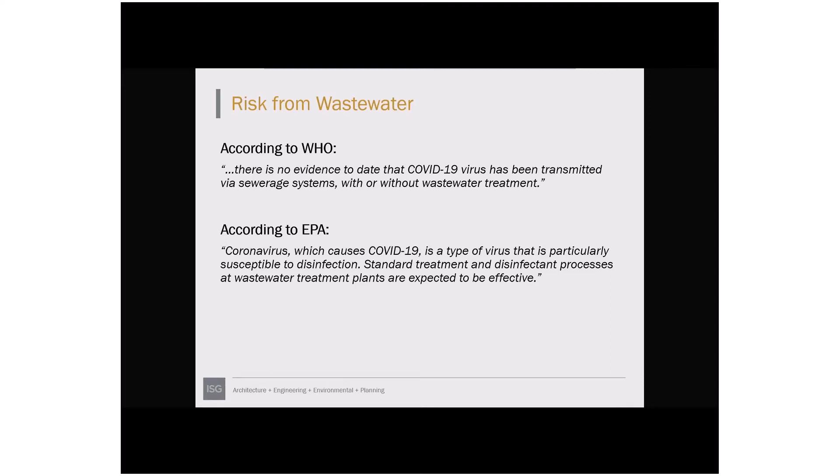According to CDC, the virus has been found in untreated wastewater, and if you're following the current news, there are some studies underway to determine the extent of a community's infection based on the amount of virus or antibodies they're finding in the wastewater system. So some really interesting research being done on that, so stay tuned for more. But there is no information to date that anyone has become sick with the virus because of exposure to wastewater.

What that does mean, though, is you need to follow your standard practices for protection. You need to follow your PPE requirements, practice good hygiene, good safe work practices, and as always, make sure that you're washing your hands well.

So there are several resources available out there, and EPA has a good resource for drinking water and wastewater. It covers system operations, laboratory capacity, funding and financing options. It includes a pandemic incident action checklist that I'll talk a little bit more about, and other resources.

So if you're having trouble or challenges with system operations, I would encourage you first to reach out to the state DNR staff. Reach out to your field office for operator assistance and to the operator certification staff.

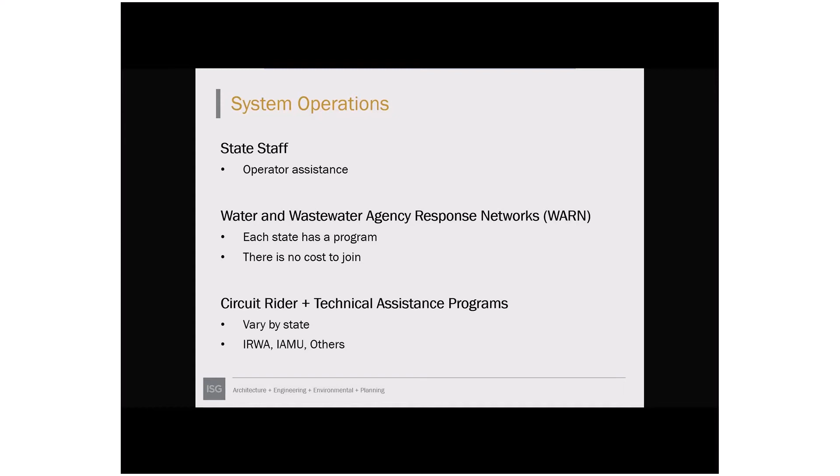So sampling. These are Iowa-specific guidelines. If you are listening in from another state, I would encourage you to check with your state regulatory staff. But in Iowa, you need to sample according to your NPDES permit, including at the frequencies and locations required.

If you're having problems doing that due to interruptions or problems for access, contact your DNR field office. There is some flexibility available in meeting your permit conditions, but you need to consult with your DNR field office staff in regards to those and in regards to other options that you have.

A little bit about the Pandemic Incident Action Checklist. This is a checklist resource from EPA, and it addresses impacts to both drinking and wastewater utilities. The following are included, but there are additionals: staff shortages due to absenteeism or illness, supply chain disruptions if you're having trouble getting chemicals, materials, or personal protection equipment, and interruptions in field operations, such as challenges making repairs due to lack of materials or staff, meter reading or sampling, and simply the inability to maintain all operations.

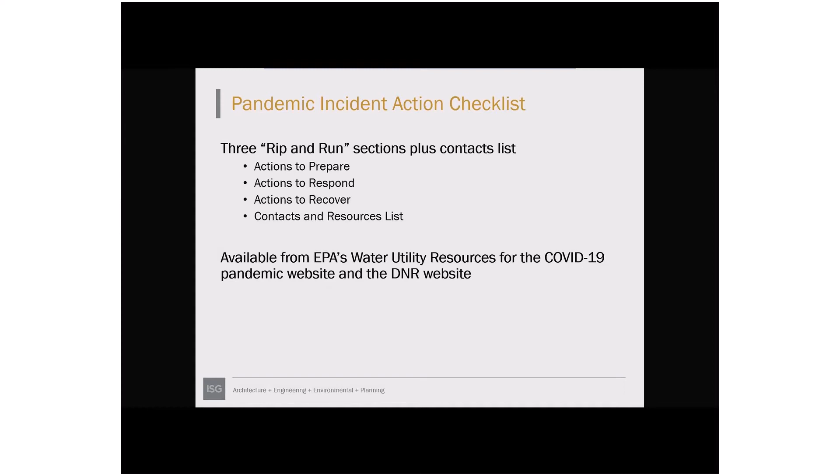Some additional resources: as I mentioned earlier, the EPA has a COVID-19 water website that includes both drinking water and wastewater. The Water Information Sharing and Analysis Center, Water ISAC, has good information. The Centers for Disease Control and Prevention, CDC, has a page specifically about water transmission and COVID-19. The Iowa Department of Public Health and the World Health Organization also both have very extensive COVID-19 websites.

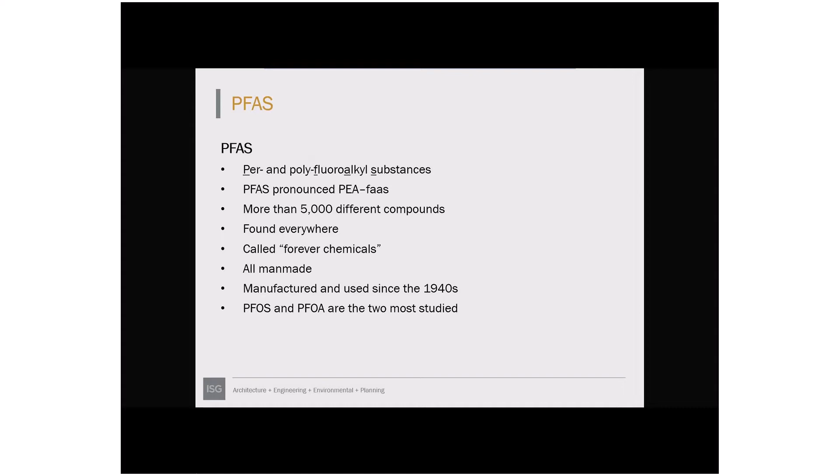Switching gears, a little bit about PFAS - per- and polyfluoroalkyl substances, generally pronounced PFAS. This is a big group of compounds, including more than 5,000 different compounds, and they're found everywhere. They're starting to be called forever chemicals. These are all man-made chemicals; none of them are natural or found normally in the environment. They have been manufactured and used since the 1940s, and PFOS and PFOA are the two that are most studied and the two you hear the most about.

So where were these used? They're used in a number of applications. One you hear a lot about is AFFF, firefighting foam, particularly used at air bases, airports, and air fire training centers. Also stain and water repellent coatings for textiles - think boots, raincoats, stain proofing on furniture and carpets, and similar uses. It's also in oil and moisture resistant food packaging - the coating on pizza boxes, microwave popcorn bags, and fast food wrappers.

It's found in a number of household products - it's the Teflon or nonstick coatings on pans. They're found in paints, waxes, and cleaning products. They're also found in personal care products - shampoos, dental floss, cosmetics, those types of things. They're used in metal plating and etching, wire coating and insulation, and a number of other products.

So why are these a problem and why do we talk about them? Well, they bioaccumulate, meaning they don't degrade and they persist in the environment. They don't degrade under natural conditions. They dissolve in water and move with groundwater precipitation. To degrade them thermally requires very high temperatures, greater than 900 degrees Celsius. There are numerous health issues at very low levels, parts per trillion, including low infant birth weights, effects on the immune system, some cancers, increased cholesterol levels, thyroid hormone disruption in humans, and a number of others under study.

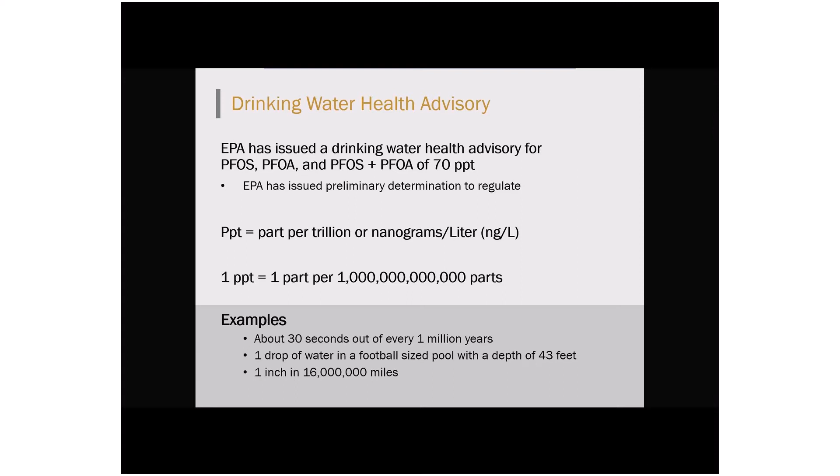EPA has issued a drinking water health advisory for two of them and the combination - PFOS and PFOA and the combination of the two at 70 parts per trillion. EPA has also issued a preliminary determination to regulate these in drinking water. PPT is parts per trillion, or nanograms per liter - that's 1 part in a trillion parts. Examples of how small these levels are: it's about 30 seconds out of a million years, or 1 drop of water in a football-sized pool with a depth of 43 feet, or 1 inch in 16 million miles. So these are very, very small levels we're talking about.

In wastewater, we see PFAS found in domestic wastewater coming into your influent, in industrial wastewater, in landfill leachate, and in water treatment plant waste if your water treatment plant is removing or treating to remove PFAS. We're also finding it in your effluent and in biosolids, present in both. This is a cycle I want to spend a little time talking about. Truly what we're doing is just moving them from one area to another. Remember, PFAS don't degrade, they don't disintegrate, they don't come apart - they persist in the environment.

So if you have PFAS in an industrial use, whether it's a production or a use, if you're getting wastewater from that industry, it can be in your influent and go to the wastewater treatment plant. If you're getting landfill leachate, it can come to you through that, or it can come to you through residential wastewater, domestic wastewater. It's found in products such as food waste, in packaging, and in materials that are treated, and we see that come to the wastewater plant that way.

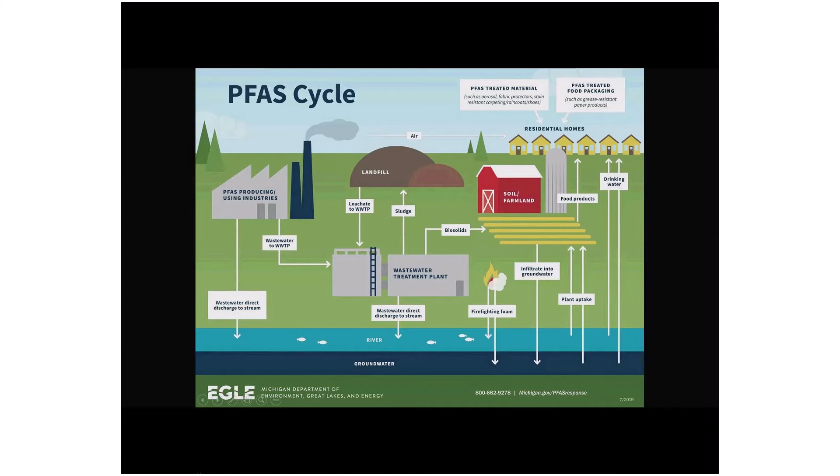So why are we talking about these? Well, media coverage and public awareness about PFAS has really increased. So you need to be aware of these compounds, so if you get questions or if the media asks you about them.

There have been several reports from environmental groups. One of the most recent ones is from the Environmental Working Group, and if you're not aware of that one, I'd encourage you to go look that one up. There have been a couple documentaries recently released. One is The Devil We Know, and the other is Dark Waters, and they've both gotten media coverage. And then there's been recent coverage of the Department of Defense sampling at Air Force and Army bases, where they have discovered some very high levels of PFAS.

So the regulatory actions that have been taken: in 2003 and 2015, companies voluntarily ceased production in the United States. Manufacturing has continued in other countries, and these products do come into the United States as raw materials that way and through various products.

In 2013 through 2015, the EPA included 6 of the PFAS compounds as part of the Drinking Water Unregulated Contaminant Monitoring Rule number 3, and that was to determine the extent and levels found in drinking water throughout the country. In May 2016, the EPA established a health advisory that we already talked about for drinking water. In February of 2019, the EPA issued their PFAS action plan, and we're going to talk a little bit more about that in a few slides. And then in February of 2020, EPA issued a preliminary determination to regulate both PFOS and PFOA in drinking water.

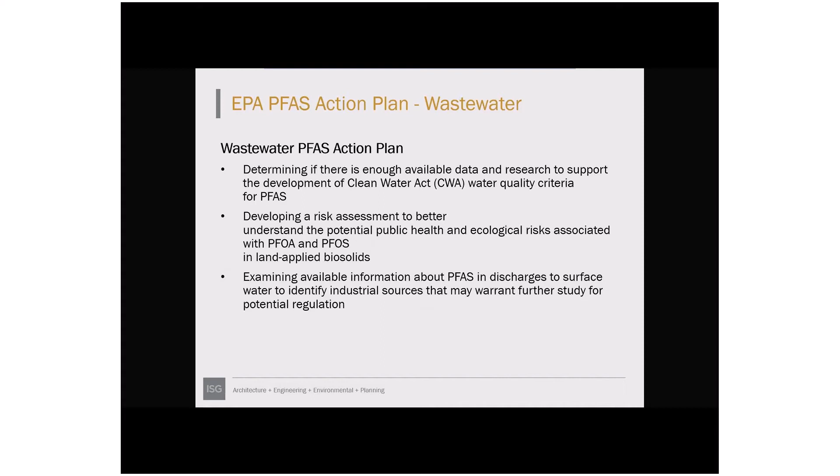And it also includes examining available information about PFAS discharges to surface water to identify industrial sources that may warrant further study for potential regulation. So as a wastewater operator, you need to know that there's a lot of research being done, there's a lot of data being collected, and there's a lot of conversation about whether or not these should be regulated as part of your wastewater permit.

So state actions - what I've just talked about was at the federal level. At the state level, several states have established statewide drinking water MCLs or enforcement limits. Some states are starting to have wastewater effluent limits or guidelines. The state of Michigan has gone so far as to have a discharge limit, an actual enforceable limit. Minnesota has been working on this since 2002. They have an area of contamination in the Twin Cities due to the manufacture of these compounds.

And in February of 2020, Iowa DNR issued their PFAS action plan, and it's available on the DNR website. The Iowa DNR is using the EPA health advisory levels for drinking water limits, and they do not have any limits for wastewater at this time.

So if you're thinking about sampling and analysis, I want you to remember that these compounds are all around, so sampling and analysis are very challenging. You need to consider: why are you sampling, if you're thinking about it? What are your objectives if you're going to sample? Why are you sampling? What do you want to learn? What compounds are you going to include in the testing? Remember, this is a group of more than 5,000 compounds. Which method are you going to use? And what are you going to do?

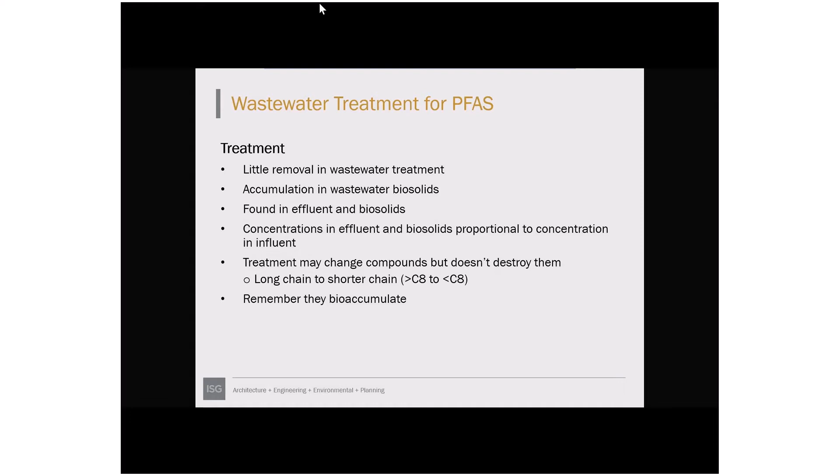So there's a lot of concern about biosolids. PFAS compounds have been detected in groundwater and surface water following biosolids application. And the main concern there is for drinking water sources and for surface water.

We are seeing uptake in plants, and then as those plants are fed to animals, we see accumulation in the animals. We see it in fish, in meat, and in milk. There are a number of stories out there about milk needing to be dumped because of the PFAS levels in the milk. It also accumulates in grains, fruits, and vegetables. There's a tremendous amount of research being done, and you're going to hear a lot more about this to come.

So there are a number of good resources out there for you. Those include the EPA PFAS website, the Interstate Technology and Regulatory Council, ITRC, has some very good fact sheets and videos. They also have a very good table of state regulations.

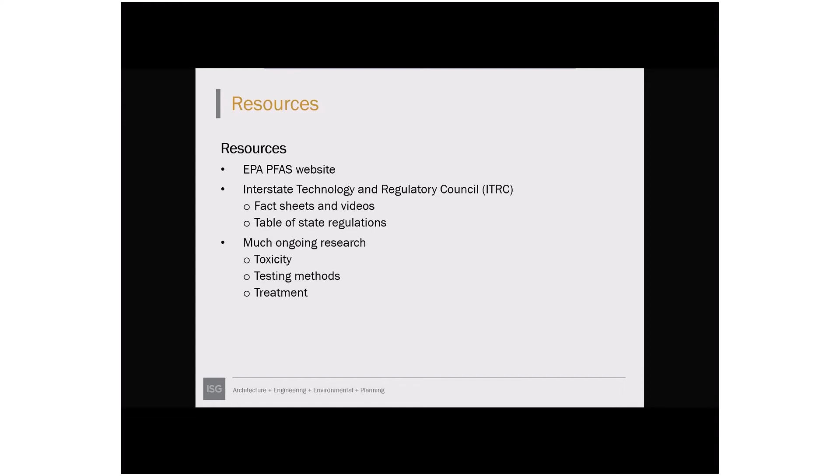Okay, switching gears a little bit about chloride compliance. So chloride, we talk about it because it's toxic to aquatic life, both aquatic plants, invertebrates, including fish. It's a base compound, it's an ion, there's nothing for it to break into, and it's not removed from the environment. It's very mobile and it moves with water easily, and it's not removed in the wastewater treatment process.

And as I said, it's toxic to both aquatic plants, fish, and other aquatic life, and then we are seeing increases in drinking water because of the discharge to surface water and groundwater.

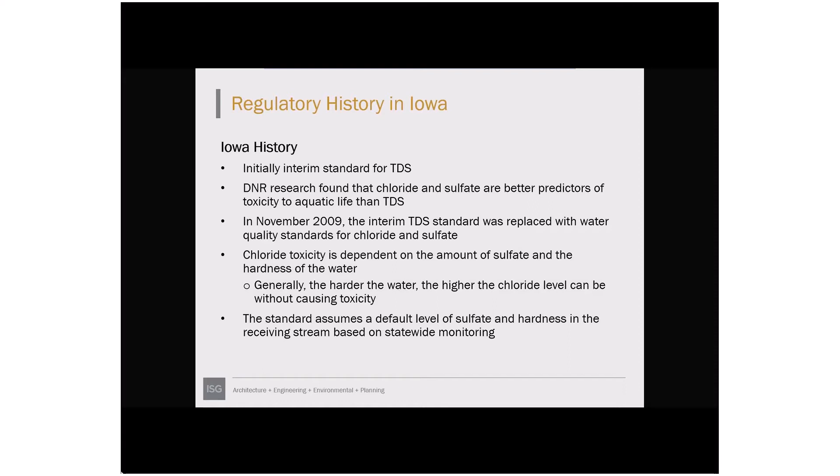If you have an NPDES renewal application, part of that process is doing sampling for chloride levels. Chloride limits are included in your NPDES permit when your sampling data indicates a reasonable potential to exceed the standard. And compliance schedules are included if immediate compliance is not likely.

There are 3 primary sources of chloride in your wastewater: home water softener discharges from the regeneration brine; municipal centralized drinking water treatment residuals that are a brine or salty discharge, such as from ion exchange regeneration and some coagulants that are high in chloride; and the third is industries that use salt in their processes.

Secondary sources, which are much smaller contributions, are personal care and household products from domestic wastewater and food waste.

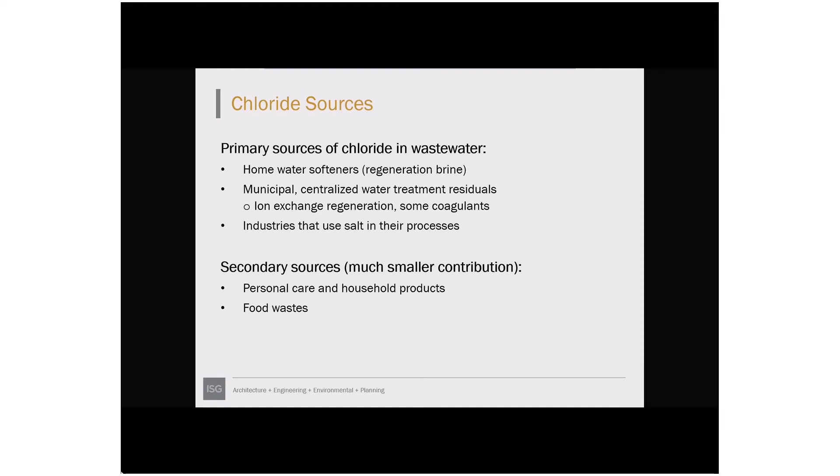So if you have a chloride compliance schedule or are struggling with your chloride compliance, there are 11 options, and we're going to go through these options to achieve or maintain compliance.

The first one is to reduce your chloride in your influent. You want to look at and reduce contributions from home water softeners, from municipal ion exchange treatment if your drinking water uses that type of treatment, and from industrial users.

From your industrial users, the best way to identify their contribution is to sample their discharges. If there's a significant level of chloride in their discharge, you need to work with that industry on chloride reduction options, which can include use of alternative chemicals or different water treatment within their compound or facility.

Ion exchange and water softeners use an ion exchange process to remove contaminants. Softeners remove hardness, calcium and magnesium, and/or radium. If you're doing anion exchange, that removes nitrates. All of these methods use a brine solution from either sodium chloride or potassium chloride to regenerate the resin. These are all resin-based treatments.

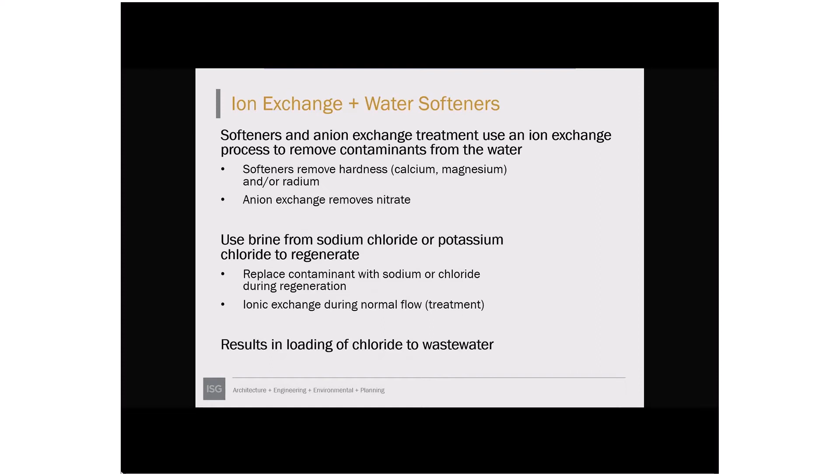Home water softeners have been found to be the biggest source of this. So utilities really need to consider some options, including encouraging your homeowners to maintain their softeners. We're finding that poor maintenance, iron fouling, and resin deterioration causes more frequent regeneration, and the more often they need to be regenerated, the higher that chloride load.

You should consider encouraging your users to change to demand softeners. There are two types of softeners: time softeners and demand softeners. Time-based softeners regenerate based on time, every Tuesday and Thursday, or at whatever period is set; some regenerate every day. Whereas demand softeners regenerate based on the level of hardness rather than time. So you need to encourage the use of those demand-type softeners.

Encourage your customers to soften only hot water taps, not cold water outside taps. Don't have them soften their entire home and their outside taps. You should consider educating your customers on the benefits of not softening to 0 grains, not softening completely, which will cause less corrosion to their internal plumbing and save them considerable amounts in salt for regeneration. I'd also encourage you to consider incentives for your customers to upgrade their softeners to demand-type softeners. We've seen that work well in some communities.

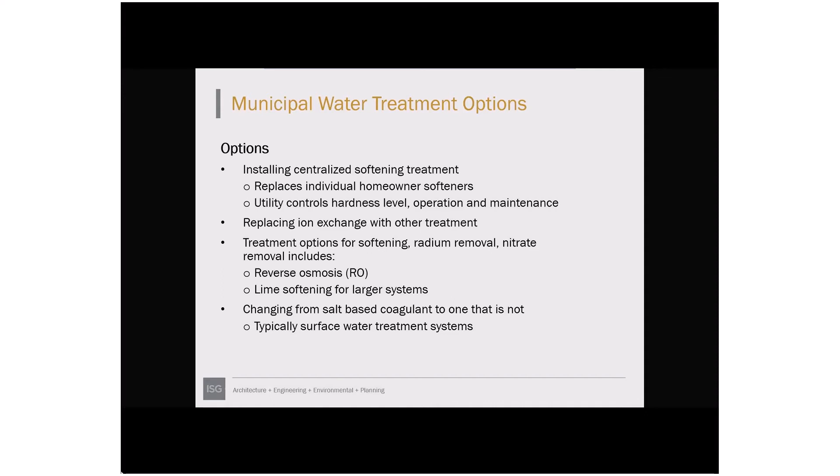A second option is to reuse or recycle the water. Investigate if the effluent or the high chloride portion of the influent could be used for other purposes. This can both reduce the amount of your effluent, leading to greater dilution in your receiving stream, or eliminate it completely. Options for that reuse or recycle could be for cooling water purposes, livestock watering, and other uses.

The third option is site-specific limits. Remember that the chloride limit is based on the hardness and the sulfate level in the receiving stream. If you sample for those parameters, you can provide data for your specific discharge site and not use the state default settings. This would require you to sample upstream, in the receiving stream, and at your discharge for 1 to 2 years — monthly sampling for 2 years, or twice per month sampling for 1 year.

For controlled discharge lagoons, you sample during the 3-month discharge period. You would need to sample the upstream site during all 3 months of the discharge period, and then sample when you're discharging — those are paired samples. That data is submitted to DNR for review and calculation to determine if they can revise your chloride limit.

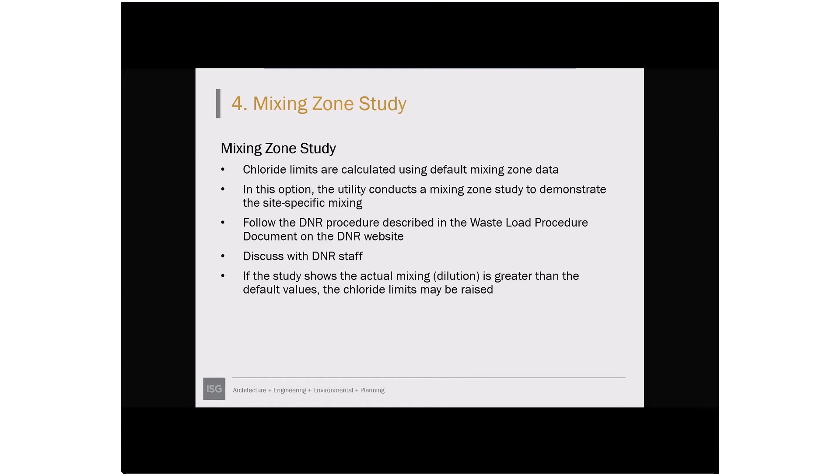The fifth option is to pipe to a larger stream. If you discharge to a small stream, consider constructing a pipe and discharging to a larger stream, as this may increase your chloride limit. You need a stream with higher critical low flows. Remember, you don't remove or eliminate your chloride, but dilution lessens the toxicity — the greater the dilution, the lower the chloride level in your receiving stream, and the less the toxicity.

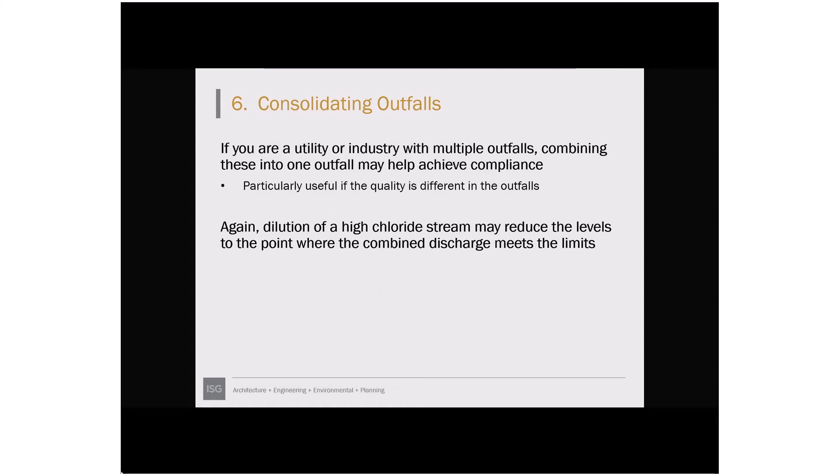The next option is consolidating outfalls. If you're a utility or industry with multiple outfalls, combining these into one outfall may help you achieve compliance. This is particularly useful if your quality is different across outfalls — if one outfall has a high chloride level and your other outfall has very low chloride levels, combining them again achieves dilution. If you dilute that high chloride stream, you may reduce the levels to the point where your combined discharge meets the limits. That's another option to consider.

The seventh option is stepwise limits. In this option, you would only discharge when the receiving stream flow is above a specific level. At this higher flow level, your chloride would be diluted to a point where it's not toxic after mixing in the receiving stream. Factors to consider: do you have enough storage for low flow conditions? During low stream flow, you would have to store what you'd normally be discharging, and then discharge it when you've got higher flows. You also have to accurately measure your stream flow so you know when you're at the level you're allowed to discharge. I'd encourage you, if considering this option, to consult with DNR.

The eighth option is to install a diffuser. This includes installation of an in-stream diffuser to allow rapid mixing and greater dilution. This diffuser has to be properly designed because what you're trying to achieve is rapid mixing to minimize toxic effects, while also allowing for safe fish passage. This option requires that you do a dye test, modeling, or other means to demonstrate that the mixing is complete within 100 feet downstream of your discharge location. There are several permits required for this in addition to your wastewater permits, and you need to contact DNR staff if you're considering this option.

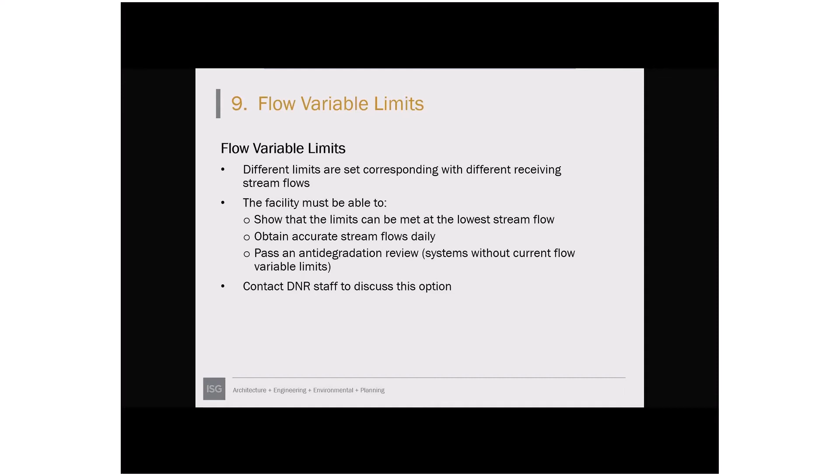The tenth option is disadvantaged status. In this option, you would have your compliance schedule extended based on qualification as a disadvantaged community. There is a very detailed flow chart that would walk you through what's required to determine if you meet those disadvantaged community requirements, and they're very specific. I would encourage you to contact DNR staff to work through that process and determine if you qualify as a disadvantaged community.

The last one is a variance request. If you have no other options, you can apply for a temporary variance from the chloride standard. This is a very detailed process requiring approval from the EPA and DNR rulemaking, used as a last resort after you have exhausted all other options. Again, I would encourage you to contact your DNR staff to discuss these requirements.

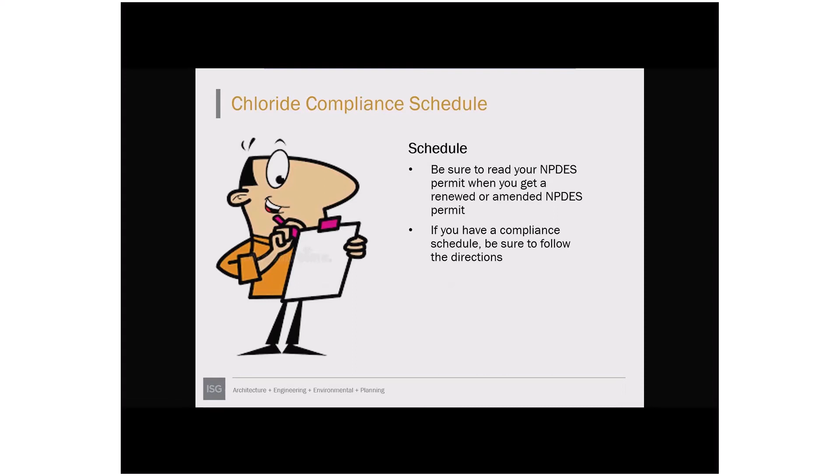I would encourage you always, when you get a new or amended NPDES permit, to read it when you get it. Make sure you go over it and understand what it includes. If you've got a compliance schedule, be sure to follow the directions and the requirements.

So you need to be on top of this. When you get a revised or new renewed NPDES permit, it looks like that achieved compliance date is a long time, five years out. But understand that this facility had actions they needed to take within 3 months and within 6 months, and then annually submit reports after that. So it's very important that you read your permit and understand what that compliance schedule requires.

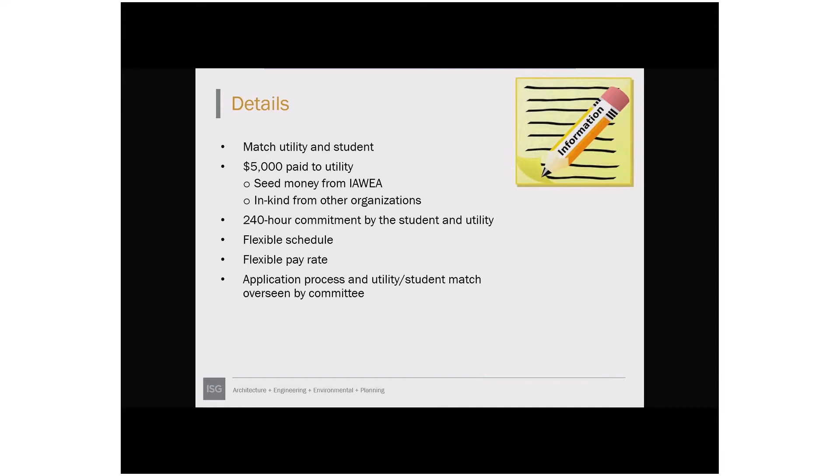It includes flexible schedule and flexible pay rates. Both the schedule and the pay rate are negotiated between the utility and the student. It also includes an application process both for the utility and the student, and for the utility and student match, which is overseen by the committee.

The COVID-19 situation and schools being out of session for the remainder of the school year has created some challenges for us, but we're in the process of matching the first utilities and students. So if you have interest in being a sponsoring utility, please contact any of us, and we will talk to you about the details, provide you with additional information, and be happy to explain further.

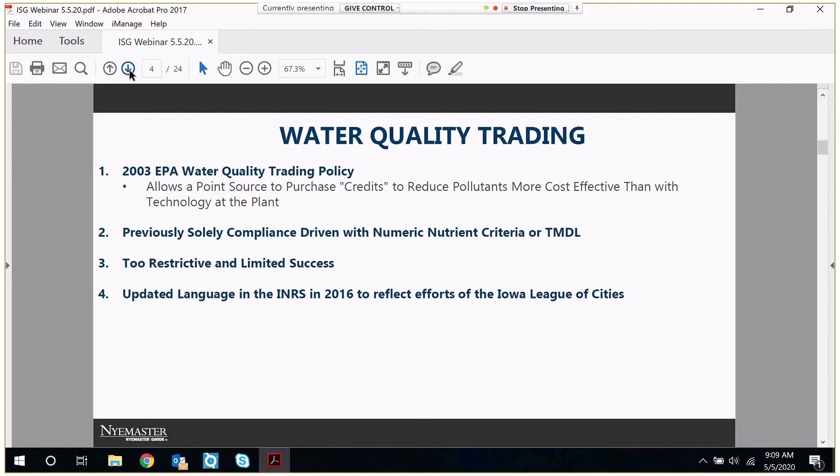So that's where the development of the Nutrient Reduction Exchange began. As I mentioned, it really was a process driven by the league from 2013 to 2018, and that is important. And what you would hear from DNR is one of the things we identified, is that in other states it had been a regulatory agency driven process and not really thinking about how communities would actually utilize them.

For us, we tried to work directly with the wastewater operators in the cities to actually understand what would be useful to their communities. And in the same boat, we also included agricultural commodity groups and advocacy groups to understand what would producers see as an advantage.

That was extremely important as we looked at that, because as I went to national conferences to get an understanding of water quality trading, the key here is it's important to understand that while an edge of field infrastructure project looks very good to a wastewater operator because it looks like a stormwater practice, that actually has no economic benefit to a producer.

So for them to spend money at the edge of field on something that they don't actually get to achieve can be a challenge. So how do you get that person to think differently is important. And having those two groups there, understanding the motivations and understanding a difference in thought process and worldview, helped develop a process that actually works.

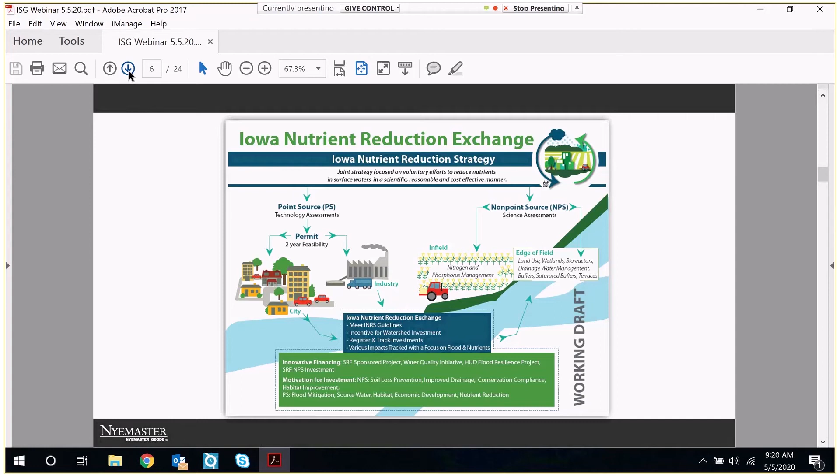Here are the regulatory incentives that we discussed with DNR through this process. And let me just say, the Nutrient Reduction Exchange is available. You can use it today. While the project ended in 2018, 2019 in setting this in place, the whole goal was not only developing it so that the state could identify those things that were most important for the state in developing this connection between a non-point source and point source, but also individually tailored to the wastewater treatment plants.

So we put our thinking caps on and said, okay, if I were to make a buffer strip project a county away, and I'm looking at this from a flood reduction standpoint or source water, here's the environmental benefits, the regulatory incentives that I want to achieve from the department. What are those regulatory incentives? I'll go through these in more detail, but it's important to understand that you can go in and ask for any of these things, and we've gotten the DNR to say yes. However, if no one wants to use them, there's no reason from a policy standpoint for the DNR to develop those policy tools to actually make them usable.

So the first one being utilized in the current community that I'll cover towards the end: you'll see these trade ratios at a 2-to-1 or 3-to-1 to essentially offset performance, since your buffer strip doesn't perform the same year after year, which is why you model and determine this error aspect. But what people wanted was to provide an incentive before this becomes a permit requirement. They wanted a 1-to-1 ratio for their projects if they build before it became a permit requirement.

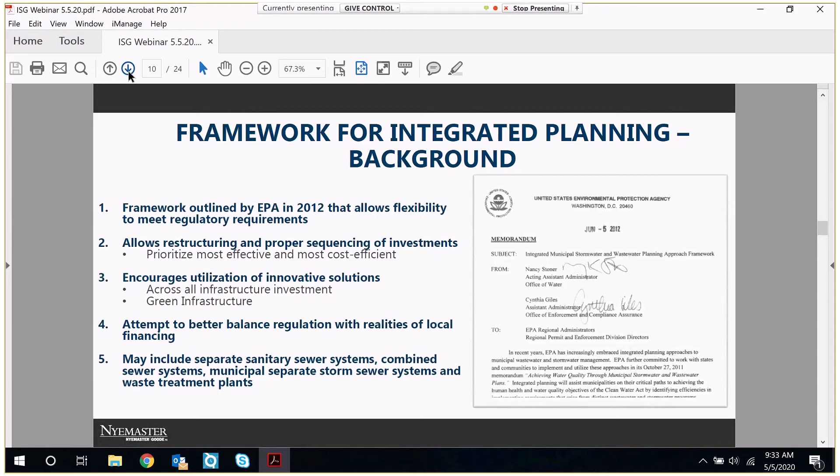As we develop an integrated plan with multiple other cities, if somebody has a compliance schedule, if somebody has an admin order, we develop the plan and then work on those additional tools to include those.

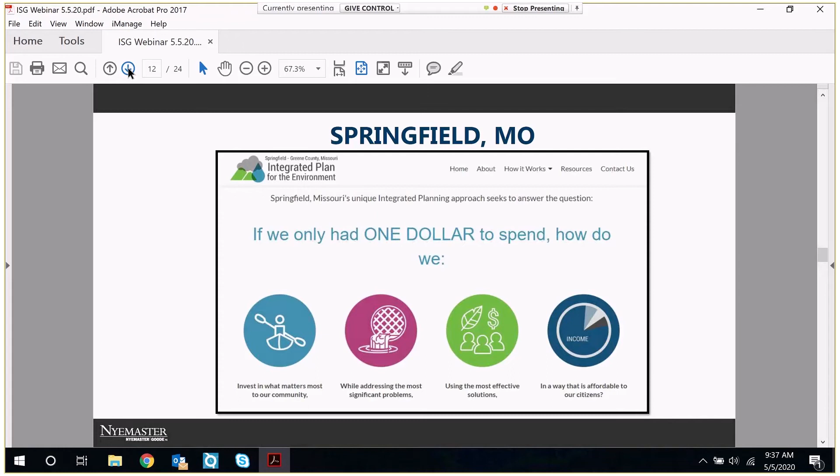The easier example, and if anybody's interested in this, my email's at the end and you can email me and I can send it to you: the city of Boone put one in place around the 2015 timeframe.

What it essentially looked like was probably what you guys are doing in a lot of your permits anyway, kind of a CIP schedule or their infrastructure schedule, being thoughtful about where the investments will occur, and then writing a narrative around it as to why they think they should be able to extend it.

You could see their big key here was on UV disinfection, and really their whole goal was to try and kick that out in a way that fit within their larger city budget for their citizens from a rate increase standpoint. They also had significant I&I issues, and their justification was to try and knock down a lot of the I&I because their storm surges were so huge that if they could knock down the I&I, by the time they were to size their UV technology, it would be in a much better place.

Now, that was their ultimate motivation, but the narrative, from FY17 there, to the UV disinfection, was all about achieving a better benefit of knocking down I&I and other environmental benefits.

This is probably a 7 to 10 page document in comparison to the Springfield one, which would be multiple hundred pages of documents over multiple years. This is essentially a compliance schedule that many of you worked on across your communities, just done in a fashion that puts more narrative behind it.

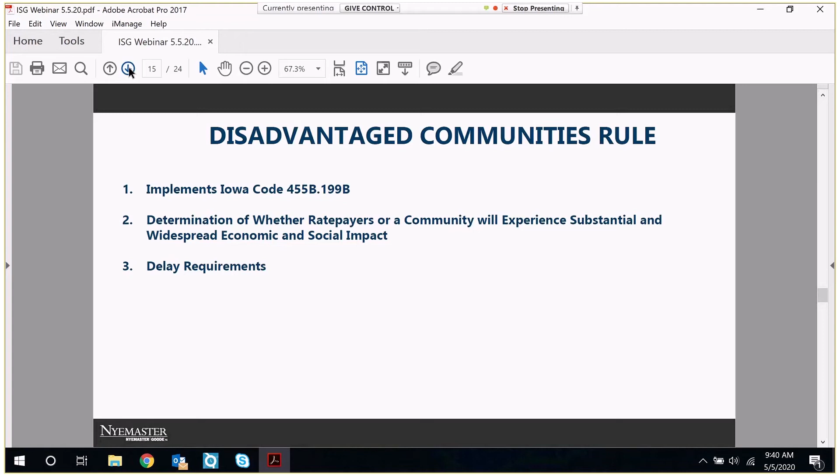I wanted to cover some resources, because it's not enough to just tell you here are some policy solutions—at some point, whatever you commit to with DNR and the EPA, it would be nice to have somebody pay for some of that. As I mentioned, the water and environmental programs at USDA Rural Utilities Service have population threshold restrictions. For the grant portion it's fairly low, but I'm sure many of you have utilized USDA Rural Utilities Service funding, which is loan and grant based. The grant is restricted based upon size.

WIFIA is available. What I'd say with WIFIA is this is generally above $50 million for a project—another fund available. Honestly, unless you're trying to do something extremely innovative under WIFIA, our state revolving fund is operated so well, and the interest rates are so low, I would probably direct people to our SRF, just because of the thoughtfulness as to how it's been operated and developed in the state of Iowa.

Our sponsored project program—we were only the third in the country to do this. And what's interesting is we were the first to allow sponsored projects to be outside of city limits, which is a real innovation around the country. That kind of happened accidentally, where the Rathbun Rural Water Association wanted to address source water issues because of a massive phosphorus problem they had, but it's certainly allowed all of us to innovate, especially on this concept of nutrient reduction exchange or water quality trading.

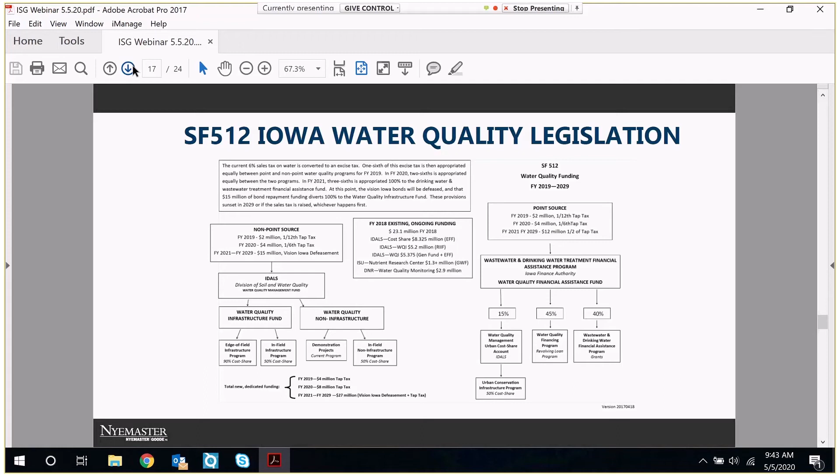The legislation that came out in 2018—I'm sure ISG will make these slides available to you, you're welcome to have them. This just gives you a broad overview of how the money will flow to you and to the projects, but specifically how the projects were identified through existing programs: a cost share, which would not necessarily impact urban communities; the Water Quality Initiative, an annual appropriation at the state level of roughly a little over $10 million, which has an urban infrastructure component that's been paid for since then; and other aspects that have been paid into since 2013.

Those were things that were already existing. What was created in the law were some edge-of-field programs. This is all non-point source, so I won't go through it in detail, but this is where your opportunity lies, in a project thinking about edge-of-field infrastructure. This is up to an 80% cost share, so you could actually achieve a project upstream or in your watershed and pay very little to achieve the benefit back from the Department of Ag and Land Stewardship.

This can also be utilized in a demonstration project. These are HUC 12 related on the demonstration project side, and HUC 8 related. You can see there may be an opportunity if you continue to look at updates on IDALS' site, to find existing projects that you could partner with in your community.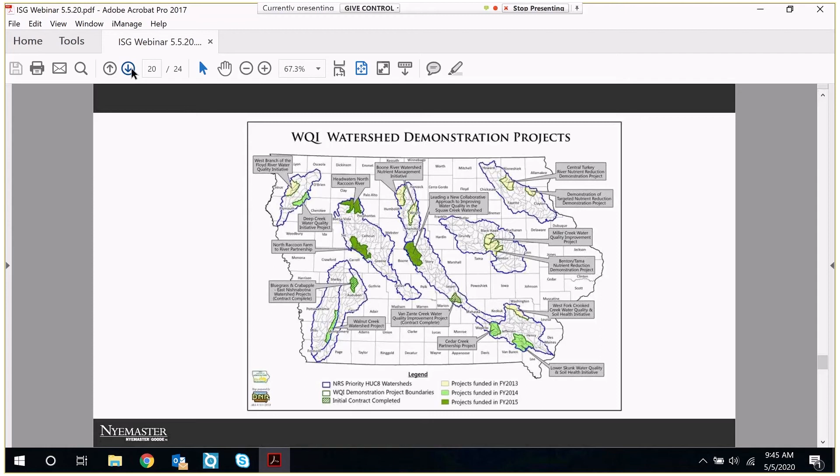But here are the major things that are now available to you that weren't before. First and foremost, there is a new state-money-only revolving loan fund. It's important that it's state money only because it has the ability to avoid Davis-Bacon and American Iron and Steel requirements, so some of the benefits you're trying to achieve, even just from a regulatory standpoint, might save you a little money.

What I will say is there's a little frustration in the law because it has a trigger for this three-eighths of a cent funding, so the ability to leverage has been limited, and they've been having to wait for the appropriation. With a slight law change, that $51 million could be leveraged and bonded against immediately, and look more like $151 million. Eventually, this will mean lower interest rates to incentivize people for certain types of behavior.

But until it is mature, it will have some limitations. The one thing I really wanted you to be aware of is that as funding slowly comes into IFA, there's a grant program capped at up to $500,000 that will be coming out through IFA. The money is slow, but as I mentioned, full ramp-up is this year for the program, and it runs through 2029. For more information, feel free to reach out.

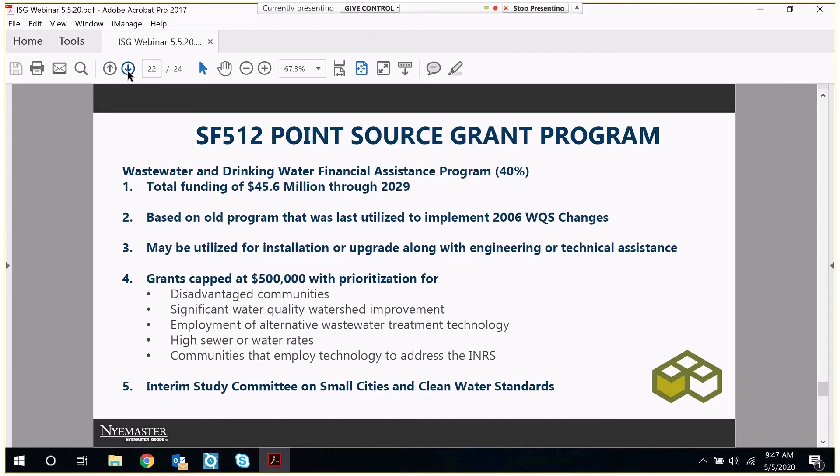And finally, there is the Urban Conservation Infrastructure Program that IDOA has had under the Water Quality Initiative. Now through 2029, the Department of Ag will have an additional $17 million to put towards urban infrastructure. These have been used for permeable pavers, for buffer projects in parks, but there's a whole lot of flexibility available to decrease erosion, with the whole focus being on water quality.

So I wanted to leave those resources with you. My contact information is here. If anyone would like to reach out on any of these subjects, I'm happy to take it. I don't know if we have any questions, but I'm happy to take them.

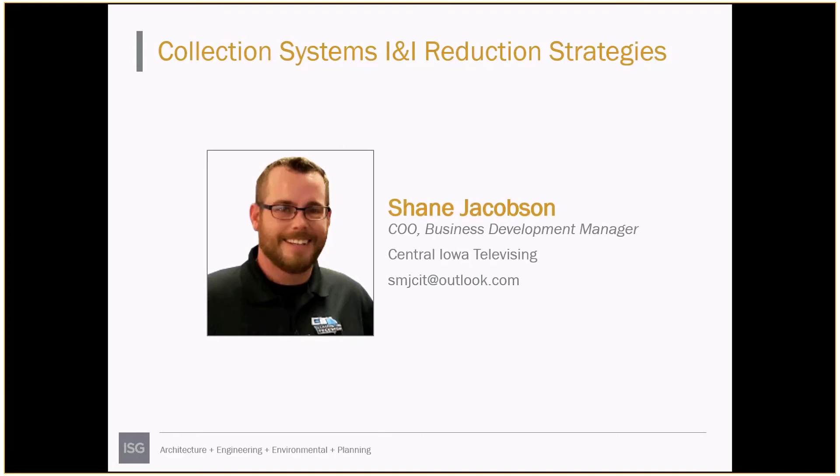Jumping into my piece here, some objectives to define up front that we're going to go through. Lots to run through in the time slot that we have, so I'll try not to be too quick, making sure we cover everything. Components of flow in a collection system - a basic introduction to the water being conveyed to the treatment plant. The evaluation process we typically follow to evaluate a system and prioritize recommendations, collection system flow analysis methods, and then how we use modeling to evaluate capacity in a sewer system.

Sewer collection systems are a conveyance network designed to collect and move flows to a downstream treatment facility - anything that gets moved from point A to point B throughout the city down to the treatment plant. It's a network of pressure and gravity pipes to convey the wastewater. There are really three types of systems we look at. There's a separate system where you have an isolated sanitary network and storm sewer network. They flow just in their isolated pipe networks throughout the system.

A combined system is where we have clear water entry getting into the sanitary. Systems are typically sized to be larger to handle that peak flow. And then a partially separate system, or maybe some areas of town where we can't get those combined connections off, and we just leave them connected to the sanitary.

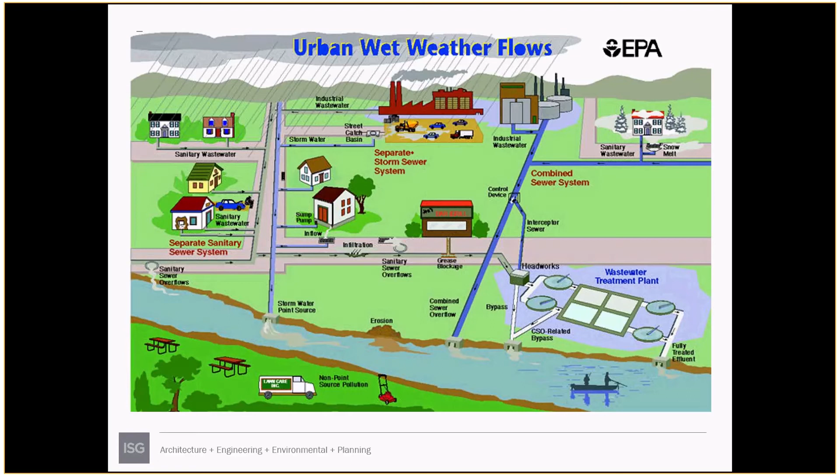Components of flow in a collection system: we have our dry weather flow, which is our low flows throughout the system. Rainfall induced inflow and infiltration, so the peak flow that is really related to rainfall activity, and then slow infiltration relating to groundwater conditions and below surface water entry.

I wanted to show this graphic. We'll talk about flow analysis in a little more detail shortly, but I want to give a representation before we dive into some of these particular pieces - what we see when we're collecting data in a sewer system that has tremendous I&I problems. You can kind of see, we plot out the dry weather, get a low flow comparison of what our base flow actually is, to see the severity of what we're getting into our system beyond what actual wastewater production is.

So the green line is representative of flow meter data of an actual system being monitored. At the top, we'll plot rainfall, so you can see as the rainfall intensifies, we get peaks in our flow, and as it gets really intense, the peaking factors grow exponentially.

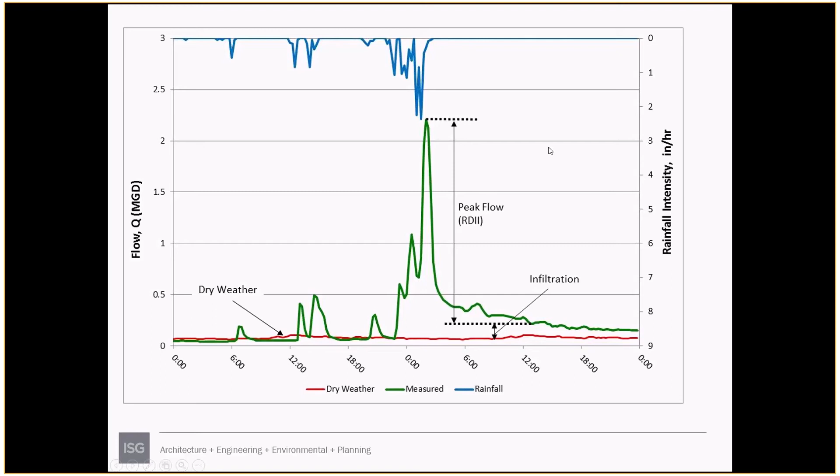So three components we'll talk about: the dry weather, just the base low flow; the peak flow, the rainfall induced inflow and infiltration, that quick flow into the system from a rainfall event; and then the infiltration, for the slow infiltration that would be quantified after the rainfall event subsides, relating to elevated groundwater conditions in and around the sewer.

Dry weather flow, by definition, refers to wastewater flow in a sewage system during periods of dry weather with minimal infiltration values. So that low flow is what we're looking for. It's residential and non-residential wastewater use. We're looking for wastewater production only and no stormwater.

And I found a slide that I could throw a picture of my 11-month-old son up here. He's learning to brush his teeth right now, and he's got 4 teeth, I guess.

But just an example of some of the things that we do throughout our daily lives, what we consider just wastewater production: brushing our teeth, going to the bathroom, showering, doing dishes. That's what we're accounting for in our dry weather flow into our sanitary sewer systems. And we'll quantify this during the lowest flow, driest month throughout the year, as we're looking through data to try to get that base flow established.

RDII definition: it's a portion of water in a sanitary sewer system that occurs during and after rainfall. Take it back to that slide that we're looking at with flow data. It's the main cause of sewer overflows and basement backups. Puts a ton of stress on the system as far as flow components. It puts the max stress on your collection system network.

Okay. Sources, I wanted to touch on sump pumps. Recently had a project that we're looking at some of the connections to the sanitary sewer system at particular locations. Areas that are flat, don't have any storm sewer that's relatively close downstream. There's really two options with some of those discharges. They can't discharge to the yard. That'll just recharge the groundwater, and the cycle will never complete until, I guess, the groundwater levels drop enough.

But two outlet options: you can run it out to the curb line and do a curb knockout, and then maybe the nearest downstream sewer can pick it up, or it's connected to the sanitary. And some of the issues that we run into, these sump pumps have variable design components, but some can get up to 70, 80 gallons a minute. And if you get several houses connected to a sanitary sewer system, they're not sized to handle that. That's going to result in quite a bit of capacity reduction, and could result in basement backups or overflows in the adjacent network at those locations.

And I just wanted to talk about a sewer study I was working on in Des Moines back in 2015. So it was a combined sewer system located near 235, adjacent to MLK, and just going through trying to separate as much as we could. The stormwater intakes are connected directly to the sanitary sewer system. That picture in the top right, you can see the water can't even get in there. The sewer is so overwhelmed, and that's just kind of an idea of what happens and how quick or how much water can try to enter a sewer system, and the problems that can result from that.

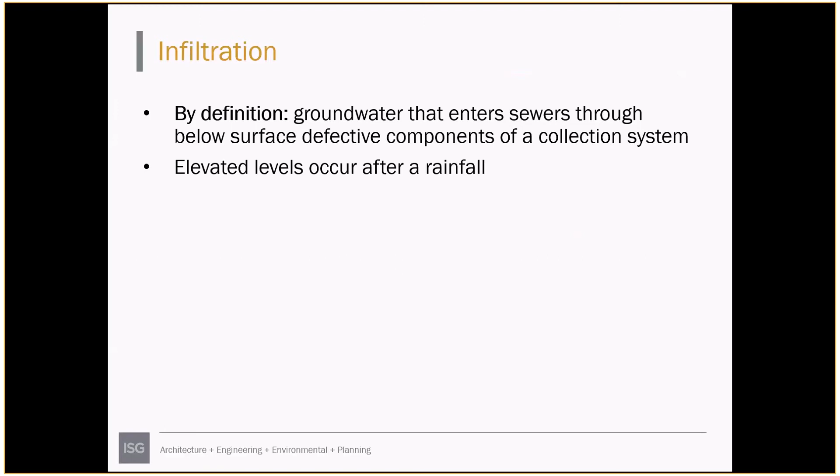Infiltration is related to groundwater entering the sewer from below surface through defective components, broken pipes, things of that matter. Typical levels will be elevated after a rainfall as the groundwater recharges. Some of the sources include age of the pipe, which isn't necessarily representative of condition but can be depending on the material, offset joints, poor installation practices like poor bedding causing the pipe to collapse or offset, and root damage. Any of these can be infiltration sources from elevated groundwater levels.

Impacts of excessive I&I include inflow or increased treatment flows to the plant, overflows in our system backing up into basements or out into the street, and reduced capacity of our network. You can think of it as: all this flow getting into our system, the RDII or peak inflow, doesn't all get to the plant, but a big chunk of it will until the sewer system backs up. Think of that as extra flow we're having to treat, and the dollars that accounts for.

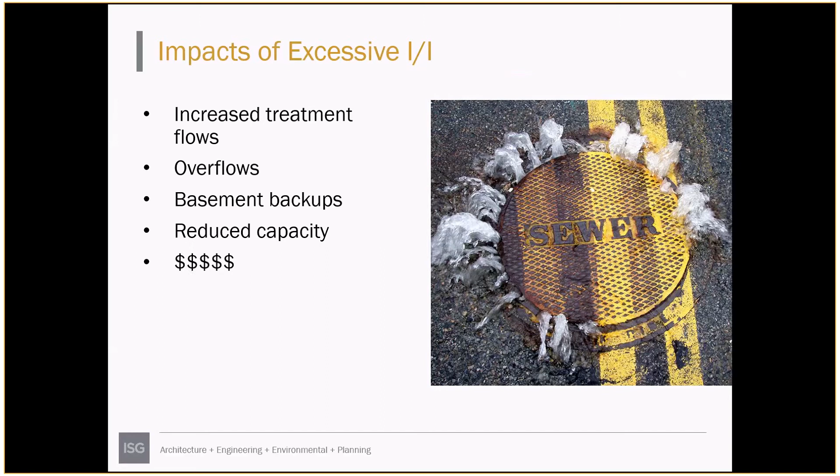Infiltration doesn't necessarily inundate the system to the point where capacity is completely lost, but over time there's a lot of volume on a monthly basis. Over time, that accounts for a lot more treatment volume through the plant, so it does have some issues as you quantify those values.

So where to start? Identify the goals of the project, what you're trying to do. You want to reduce the volume of flow to the plant for treatment dollars, and reduce the severity of basement backups or overflows. Commonly, both can be achieved through the same processes.

Begin to assess your system holistically. If you have areas you know are worse than others, you can strategically target those areas for evaluation and inspection. Talk to your engineer, have that conversation, and try to understand what the next steps are and how we can help reduce some of the severity of I&I in the sewer network.

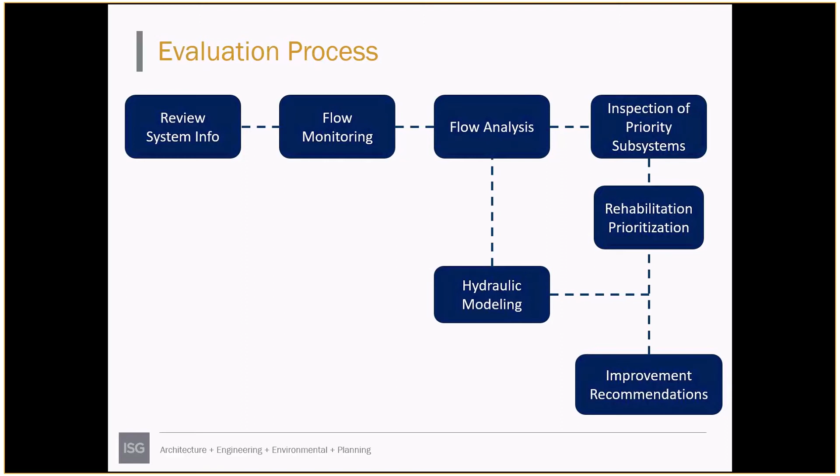This is a flow diagram of a standard evaluation process. We'll start by reviewing system information, identifying goals, selecting the areas we want to flow monitor, installing flow metering equipment to collect that data, and evaluating the information collected to quantify the flow metrics just discussed. Shane will talk about some of the inspection and rehabilitation strategies for I&I reduction during his slides, but we'll take that flow analysis, those components, and plug them into our hydraulic models to evaluate capacity, ultimately ending up with improvement recommendations for the system.

For flow monitoring, installing rainfall gauges to represent actual wet weather that occurred in the system is important. Don't just rely on local and national reported data such as weather.com—it's good to have real field rainfall gauge data associated with the flow meters installed. A general rule of thumb is every 5 to 10 square miles, have a rainfall gauge to associate with the flow meter data collected.

We'll delineate subsystems to target smaller sewer sheds. We recommend a minimum of 3 months of monitoring to make sure we get as much wet weather activity as possible, and to see the system respond to rainfall and elevated groundwater levels.

This is an example of a large subsystem, I believe in St. Joe, Missouri. There's a trunk sewer on the east side. As we delineate out, each of these subsystems is completely isolated with their outlet on the east side to the trunk sewer flowing south to this lift station. There's no cross flow between these subsystems, so we can isolate them and pinpoint problems based on subsystem or on the level of effort we want to target for certain areas.

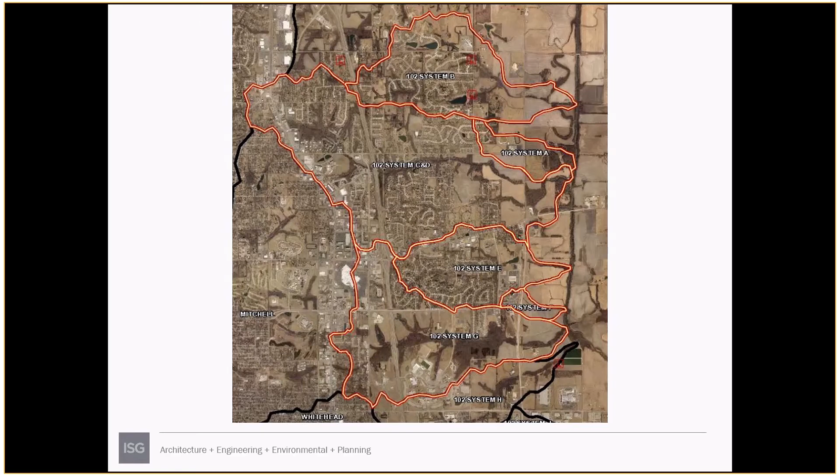For flow analysis, we're looking to quantify sewer flows using rainfall depth and intensity data collected from the flow monitoring process, and we'll utilize graphical displays of information. There are several ways engineers evaluate this data—some more complex than others. I'll touch briefly on two that I've used, both when working in Kansas City and recently: the inflow coefficient and the RTK method.

Inflow coefficient is just a composite of the rational formula. We're looking to calculate our flow rate based on a runoff coefficient, rainfall intensity, and the area of the sewer shed. We'll select storms that meet our criteria, throwing out outliers, and plot our flows versus rainfall intensity for each storm.

This is really the final output we get from running through that analysis. The triangles here are representative of individual storm events that were collected during the monitoring process. We'll be able to turn some off.

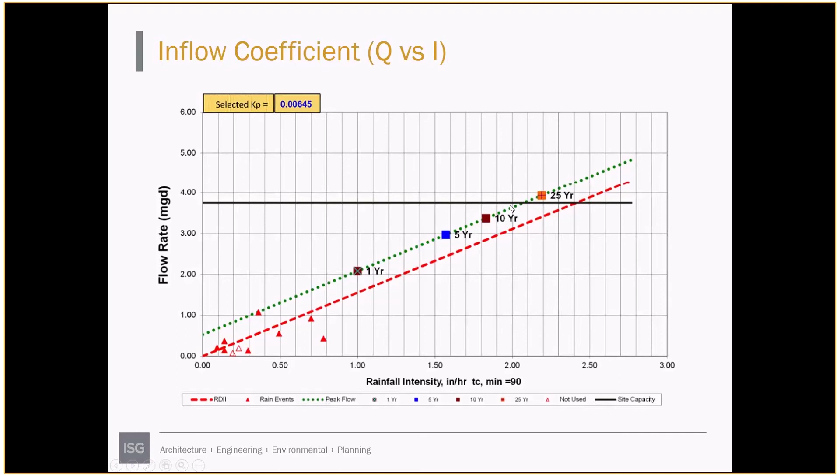What we're trying to do is get a linear relationship between what rainfall actually was for that storm and the flow we collected, and then extrapolate that out to project planning information for theoretical storm events, up to a 10 or 25 year event. We'll plot the capacity of the outlet pipe horizontally, so we can see that this particular sewer network has a capacity of just under a 25-year storm event before we start to overflow into the street or up into basements.

RTK is another one. This is based on 3-unit hydrographs. We're looking at rapid inflow, that quick response where we get a peak very rapidly just after the rainfall. Then the moderate infiltration, once that starts to subside, that piece just after the initial peak, and then the slow infiltration. These three triangles sum together and we get an overall flow. We're trying to break out those components into the system to see how it responds.

R is just the fraction of the rainfall over the sewer shed that enters the collection system. T is the time to peak, and K is the ratio of recession time to time to peak. Each of these triangles is representative of Q1, Q2, Q3, and these are the variables used to calculate what we're getting for those flows. When we sum them together, we get an overall QRTK, I guess would be the term for it, of what we're looking at for a flow in a system.

Both of these, you can find more information about on the EPA's website. I could probably talk for an hour on some of this stuff, but.

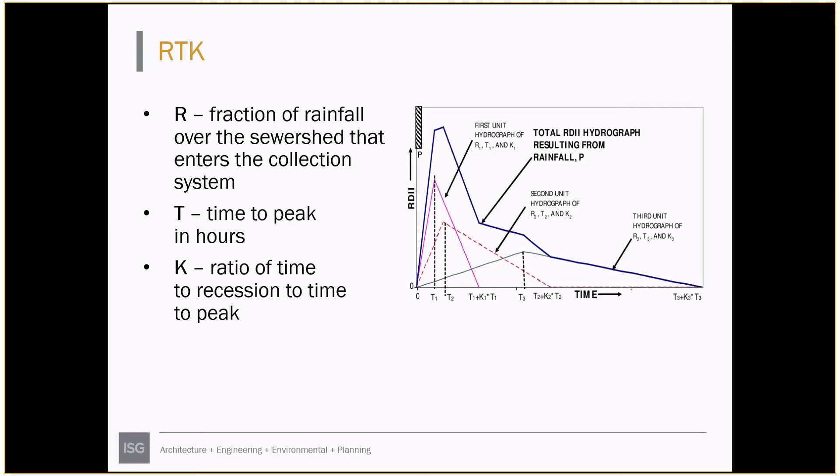So what are we trying to do with this data? We want to determine base flows, what our dry weather is, establish our peaking factors, and projections for theoretical events for future planning, as developments grow out, or just wanting to see what would happen based on a theoretical, say 50-year storm, what would happen to a sewer system under that criteria.

Really we want to look at capacity. Where do we have bottlenecks in the system? Where are we restricted? Opportunities for upsizing and things of that sort.

So basics of hydraulic capacity. We're in a sewer system, average daily flows. We're looking at average daily flow plus infiltration. Pipes can normally handle that, and then we see what happens when we add in the peak flow, and with everything together, does the sewer network or a particular pipe have capacity for those flow parameters?

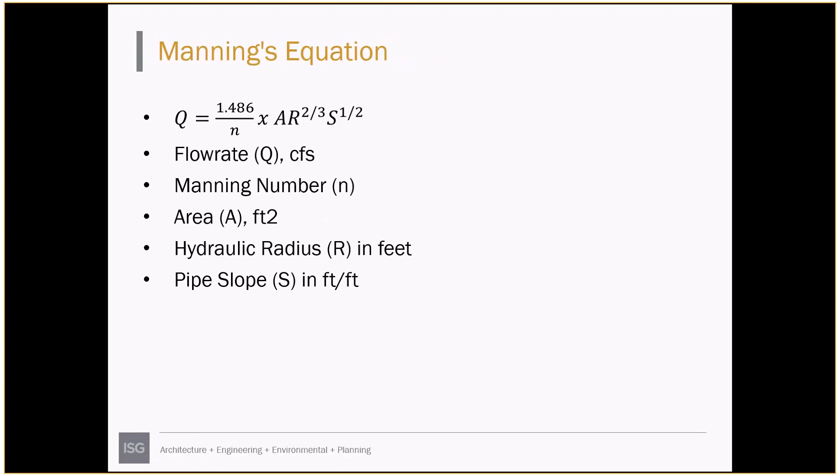Just a quick rough check, or a basis for what we'll talk about in a minute with the hydraulic modeling. We can look at an individual pipe network using the Manning's equation, looking for flow rate based on your pipe slopes, area, and hydraulic radius in your pipe.

It's important to watch the units as we're doing hand calculations. If you have something that's in inches when we're running it in feet, it'll throw everything completely off and the results will not seem right. So just watch units as we're running through an equation like this, just for a quick check.

Varying slopes result in varying capacity, and I wanted to show this graphic from a hydraulic model output, which we'll talk about here in a minute. You can see similar pipe, same pipe diameter, running down here, and the purple line is representative of a hydraulic grade line. The steeper that is, the more restrictive that section of sewer is on the system. So you can see as the pipe is flatter up here, you have a little less capacity and more restriction.

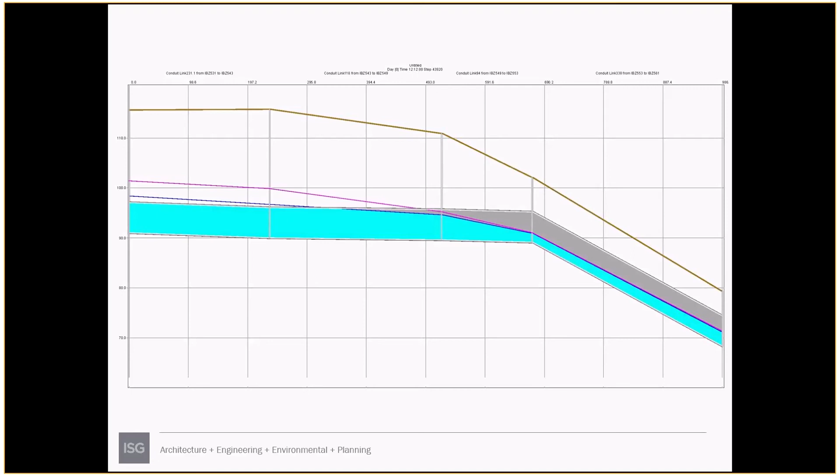And as we dive off with a higher slope, we gain a lot of capacity. So just kind of a visual representation of how that Manning's equation really works from a real world perspective, based on a profile in a sewer network with flow running through the pipe.

What we're trying to do is push flow into a system to see how it responds, what's the severity of, or what are the consequences of certain flows as they get applied into a sewer network. We're calibrating that to real-time flow meter data to make sure that the model results are accurate and representative of the system being modeled.

One rule of thumb that applies to any type of modeling, not just collection systems, is to question everything as you're building these things and running the models. If something seems off, make sure you look into that error, or just verify the results. That's just one good practice as we run models for any system, to assume everything is wrong until you know it's right.

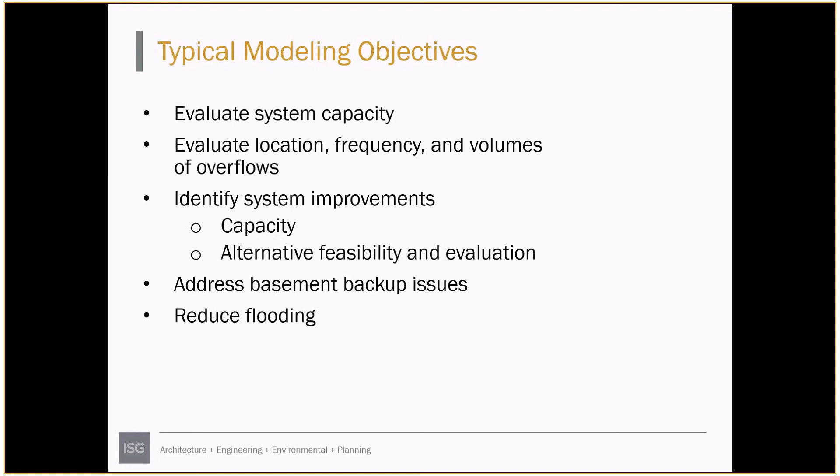So building some of these networks, we're going to use GIS data if it's available, AutoCAD or CAD data is good as well, plan information that's available. We'll supplement some of this with survey, verify any special structures, or maybe there's some missing information that needs to be verified.

Sewer shed hydrology—what's the time of concentration that we're getting? How quick are we getting those peak flows to that location? That can be identified during our flow monitoring and flow analysis processes.

Then we want to estimate flow values. The estimated flow values from the analysis output, we'll use those to build our model and create the system flow patterns that we're wanting to evaluate.

Some of the things we'll adjust here: we're looking at Manning's coefficients, any roughness of pipes, materials, just checking those things, any flow factors as far as infiltration values, abstraction values from the system, making sure that our connectivity is correct. Maybe pipe networks aren't connected together at some locations, and we're getting flow moving throughout the network in an incorrect pattern. Then time to peak, this is our time of concentration in our system, so some of those values can get adjusted down or up depending on where we're off with some of the peak flows.

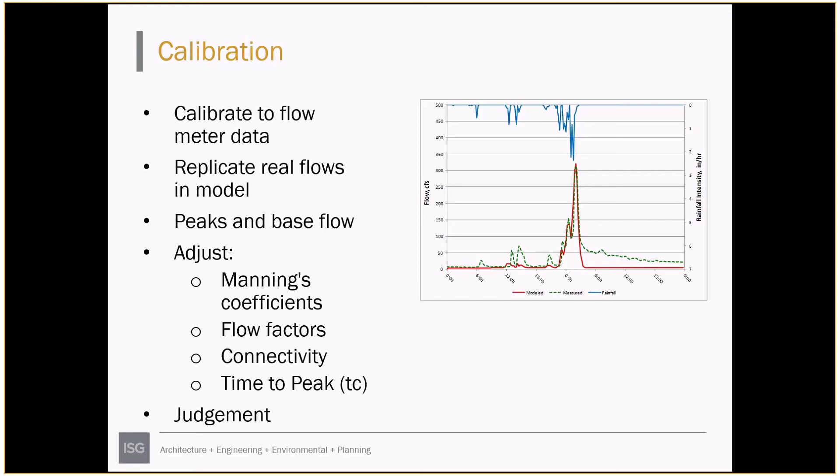Capacity evaluation looks at the system-wide picture, not just one pipe run. Typically we want to evaluate the entire system at once, mapping out where the system has capacity, issues, and restrictions. We look at the hydraulic grade line to see where the restriction components are in the 1D network and where we're spilling out, then use this information to prioritize where we'll get the most bang for our buck to upsize sewers and alleviate capacity restrictions.

He's going to talk about the I&I reduction strategies associated with I&I flow in a sewer system. So Shane, if you want to, let's see.

There you go. I think you have until 11, Shane. Hopefully I didn't.

Shane, I can see your slides, but I can't hear you.

Right, can you hear me okay now? Now we have you, thank you. There we go, a little technical difficulties here.

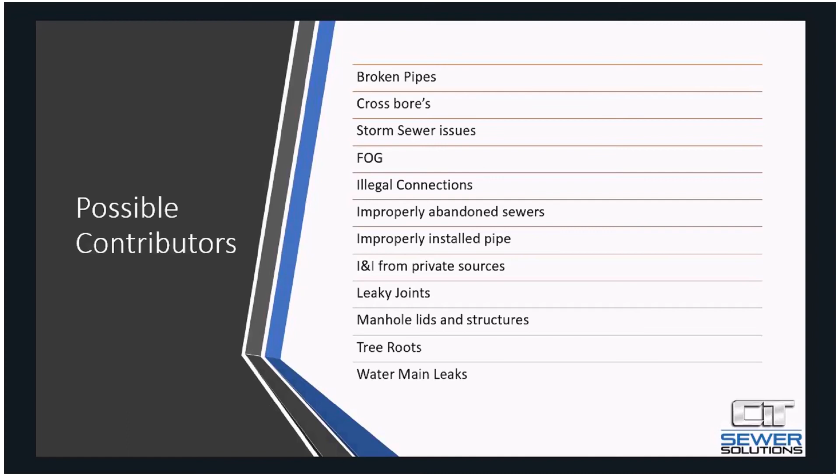Let's look at some typical maintenance program activities, just to look at the I&I reduction side as a whole. I recommend having some sort of maintenance program in place. It's best to have it written down and documented, so you can show the councils and the people in the community what you're doing and how you're addressing the issues on the maintenance side.

Getting on the proactive side and finding these things before they turn into an emergency is going to be very cost effective compared to an emergency situation. Obviously cleaning sections of town each year, a lot of insurance companies will give you some breaks, and you'll decrease your liability. If there is a backup in somebody's basement, you're going to be able to pass that cost on to the homeowner if you are actually maintaining your system.

More frequent cleaning in areas where you've got roots, grease, and other issues. Cleaning those lift stations and making sure they're going to operate properly. Definitely getting a camera in those lines and trying to identify where the problem spots are, and try to address them before they get worse.

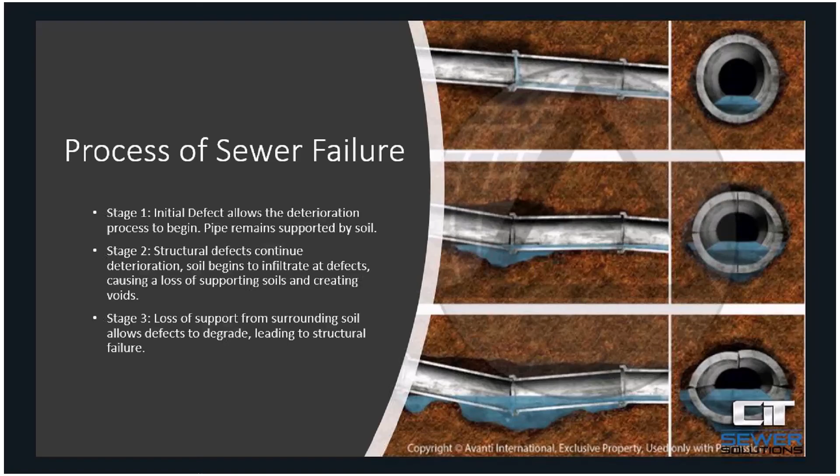A little bit on crossbore prevention and detection. NASSCO last year, the crossbore committee, released a crossbore prevention and detection specification that outlines the process from start to finish on how utility owners can prevent their sewers from being destroyed and protect their residents from potential backups due to these crossbores. We've got 100-year-old sewers in the ground that are still working great in some cases, and the value of those assets is huge.

So you've got all these new assets being installed, but in a lot of cases you're destroying some of your existing assets, and trying to stay on top of that and prevent those problems: the added I&I, the overall destruction of the sewers in these crossbore situations, and the safety risk to utility jet truck operators running a mechanical cutter down a pipe to try to remove what they think is a root mass, but in the center of that root mass there's a gas line. So a lot of risk associated with maintaining sewers that may have crossbores.

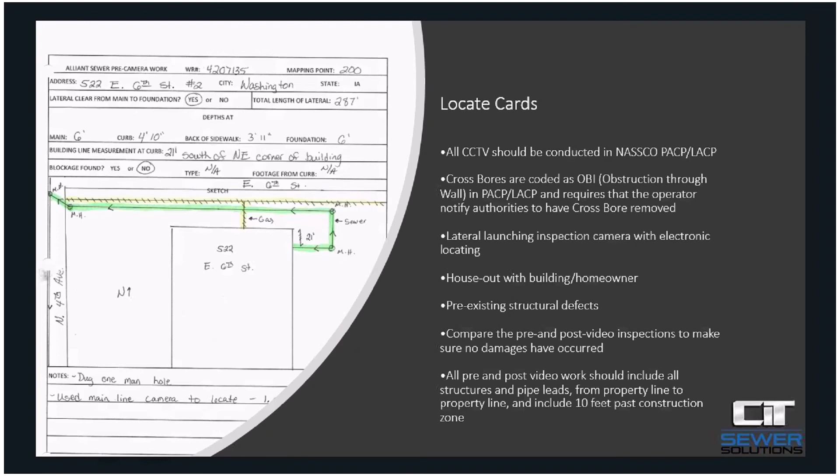Up in St. Paul, Minnesota, a few years back, this would be a worst case scenario. A sewer lateral was bored through, and the contractor assumed it was roots, and he ran a root cutter down the line and caused a gas leak, and it blew up the house. If I remember correctly, I think a couple people were killed in that accident. Worst case scenario there, definitely do not want to have any issues like that.

Some cross-bore types: you're looking at gas laterals, gas mains, fiber optic, electric, just about anything that can be bored. The higher risk are going to be the gas mains and laterals. But at the end of the day, each and every one of those potential cross-bores is a definite possible contributor to your I&I problem, and again, destroying your existing assets that are very valuable.

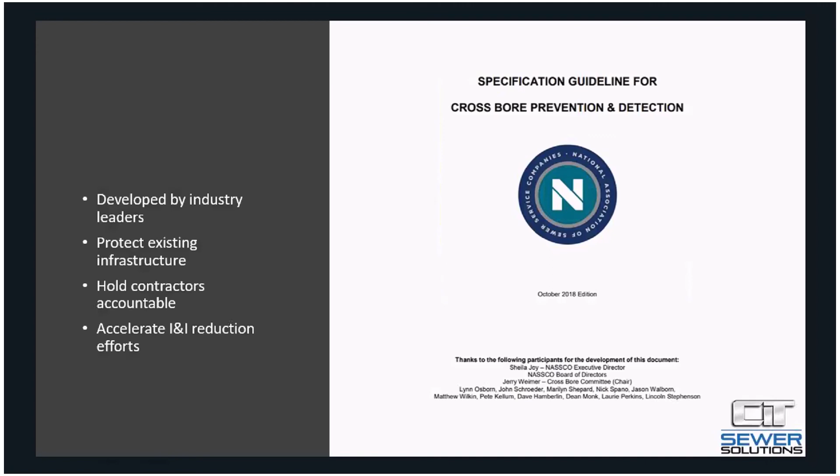A little reference there to the NASSCO cross-bore prevention and detection specification guideline. You can get that at nassco.org. Some really great people are on that committee that have good experience implementing these programs. Jerry Weimer, previously with the city of Dayton, Ohio if I remember correctly, did a great job of putting this program together there, and he's brought that experience over to NASSCO and the Cross-Bore Committee, and it's a great resource.

Touch on some smoke testing here.

Smoke testing is used quite a bit in the industry for identifying cross connections, infiltration, different things in these collection systems. But I've seen over the years that there's a lot of different approaches when it comes to smoke testing. We started out just kind of doing the normal, let's smoke 4, 5, 6 blocks at a time and walk in front and behind of all the houses and look for issues.

But thinking outside the box, especially on the smoke testing side of things, because you just don't know what these contractors did 100 years ago, or 50 or 10 years ago, when they installed new infrastructure and they ran into a pipe and made the assumption that it was a storm or sanitary sewer and tied it into whichever line they thought it should be tied to.

So you may have a situation where there's an old field tile that runs diagonally across town, and at one point near your smoke test zone there was a cross bore. That bore path at one point hit that old field tile, and let's say 5 feet later it hit a sanitary lateral. There's a new cross connection created by that cross bore. But in your normal smoke test zone, say 3 blocks, you're gonna walk in front and behind of all those houses, give it a good look, maybe spend 15 to 20 minutes, and move on to the next set.

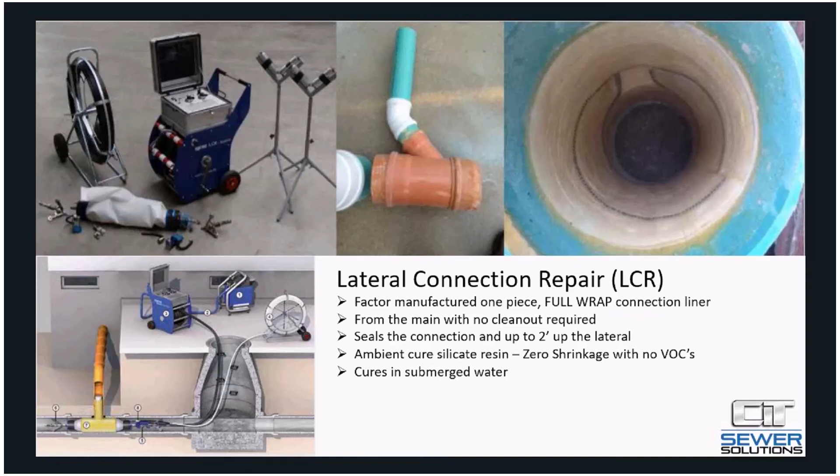Just a little clip here showing the difference between your standard polyester resins, the steam cure resins used in manhole-to-manhole lining projects. It shows the annular gap there on top. On the bottom, you're looking at a zero shrinkage resin, which is going to be your silicates or your epoxies. Those are typically used for point repairs and connection liners. They definitely do a great job of structurally fixing issues and creating a watertight seal.

A couple other advantages with the zero shrinkage resins is they have no VOCs or styrenes, so there's no risk of exposure to harsh chemicals. And the silicates in particular, they do not emulsify when water hits them, the way it comes in contact with the resin like a polyurethane, polyester resin, or epoxy would. So you are able to stop quite a bit of water without pre-grouting with the silicates.

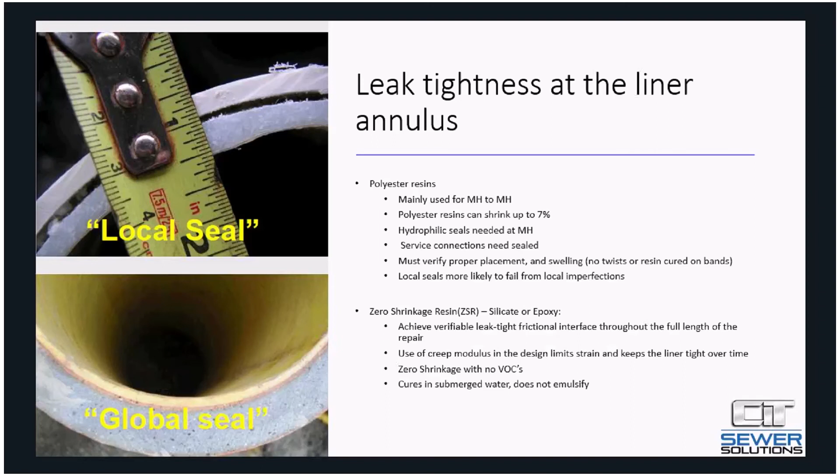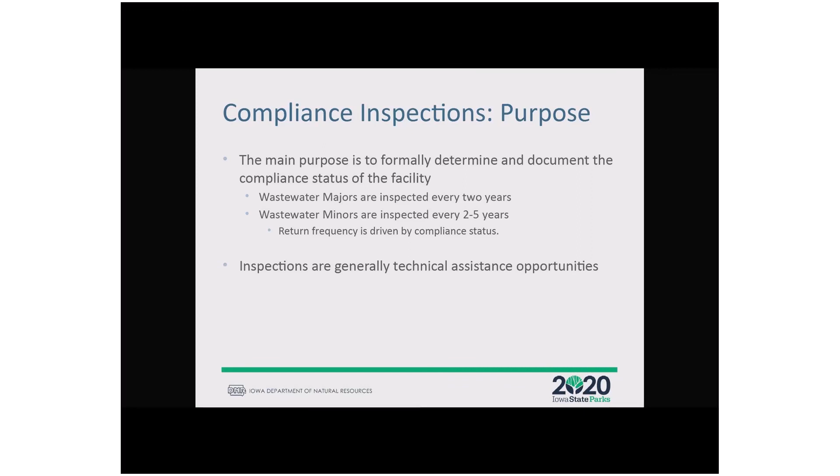So what to expect? You're going to have general introductions when somebody shows up, discussions on what's going on at the facility and records review, treatment system walkthrough, observing treatment units, things like that. Taking a look at the collection system. If you've got pump stations, lift stations, areas of bypass, things like that, we'll want to take a look at them. Having some final thoughts and summary report out, and then expect that there's going to be a written report to follow every inspection, which, depending on the findings, might require that there be a written response from the facility.

Just note that you might not always get prior notification to an inspection. A lot of times we do, especially in this current pandemic, we are notifying facilities prior to an inspection, so you should get a phone call or email to set things up, generally just to make sure that we've got staff there that can do the inspection with us. But that's not a required thing in normal operation. So somebody could show up at your facility on any given day and say, guess what, today's your lucky day, it's time for a DNR inspection.

So if it really doesn't work, we can work around that, but just note that you're not always going to get a heads up. If you do get a heads up, feel free to clean up. It says a lot about the facility, it says a lot about your desire for the facility and how much you care. Just pick up trash that's laying around, clean the flumes, clean things up, empty trash baskets and lift stations - if you happen to be breaking the law and pumping sludge to the creek, stop it that day. Things like that. So mow the grass, clean up, take pride in the facility.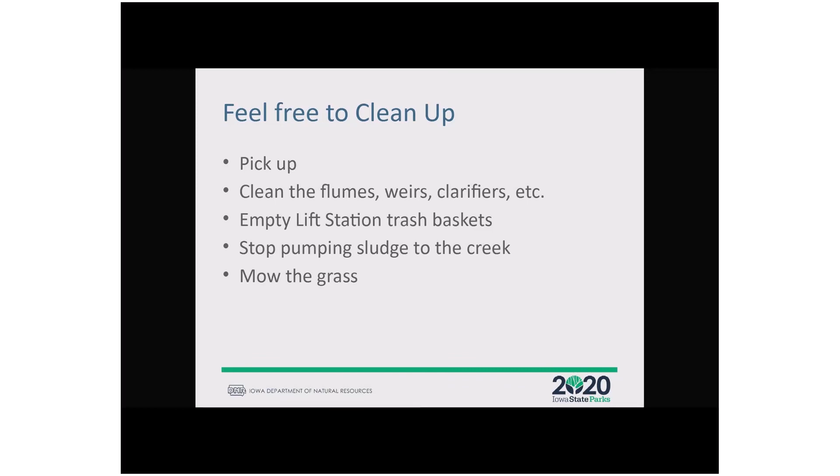All right, a little more detail on the different pieces. Discussion aspect of it. What's the purpose of the visit? There could be other reasons that the...

That was the other thing I meant to mention. I've been getting kicked off occasionally too. We can hear you, but your slides are still coming up, Tom. All right, there you are, you're back. Yeah, I meant to say I've been kicked off a few times while I've been listening in, so hopefully that won't happen too many times.

But the purpose of the visit, whether it be just a site visit, somebody who's stopping through town, or whether it's a formally scheduled inspection, just discussing why the DNR showed up at your door this day.

Logistics of the facility and what route we want to go, whether the weather plays into it. If it's raining today, we might want to sit down and do the discussion and paperwork review first, then go look at the facility. If it's sunny right now and it's going to rain in an hour, we might want to go walk around and tour the facility first.

Just logistics like that. How are things working at the facility? Is today normal operation? Things tend to break the day that the DNR wants to show up and do an inspection. I don't know how that happens, but it happens frequently. So if there's things out of the ordinary, let's talk about it up front and make sure we're aware of the situation, what we're observing today, and whether it's normal operation or not.

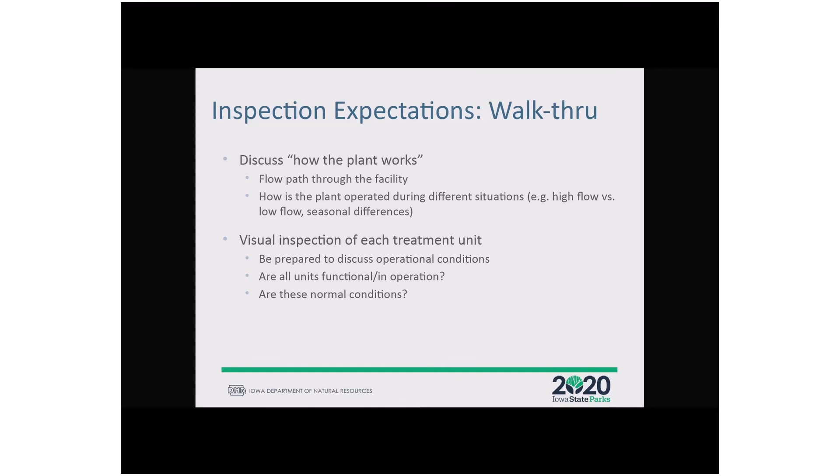Jump to lagoons a little bit. We do have quite a few lagoons in the state with different aspects that might not apply to other types of facilities, but fencing, locking, making sure the gates are locked, and signs all the way around the facility so people know it's not their local fishing pond, but their wastewater lagoon.

Lots of vegetation to maintain on a lot of these, mowing for easy access and so you can observe the integrity of the berms. A lot of people ask how long or short the grass needs to be. It doesn't necessarily need to look like the fairway on a golf course, but I typically say it needs to be 6 to 12 inches or less so you can see what's there.

If you see damage, holes in it, seeps, things like that, you want to be able to identify and see that. Woody vegetation is a no-no, so make sure you get that off the berms. And if there's any excessive aquatic vegetation within the lagoons, there can be some maintenance of that as well.

Water level, can you measure it? We typically expect it to always be maintaining 2 feet of water in the lagoon to keep that clay liner wet and to make sure there's at least 2 feet of freeboard at the top. So if you do get a big rain event, you're not in danger of going over or causing damage to the berm. So you've got that operating level between 2 feet at the bottom and 2 feet at the top.

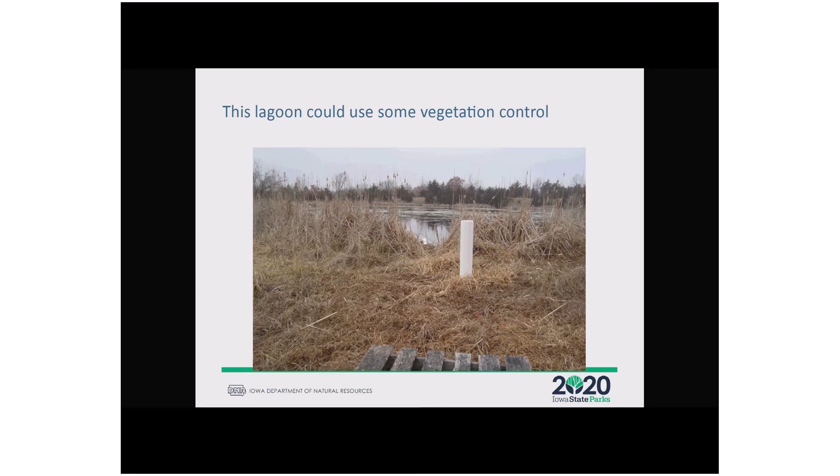This one, not so much. Vegetation control is a big deal. I always tell people that if I had to go out in the morning, especially on a day like today, and walk around in wet grass that got wet all the way up to my waist, I'm probably not a very happy guy. So it doesn't really bode well for doing an inspection when I'm uncomfortable either. So maintaining your system can have other effects as well. But maintaining the vegetation around a lagoon cell is critically important.

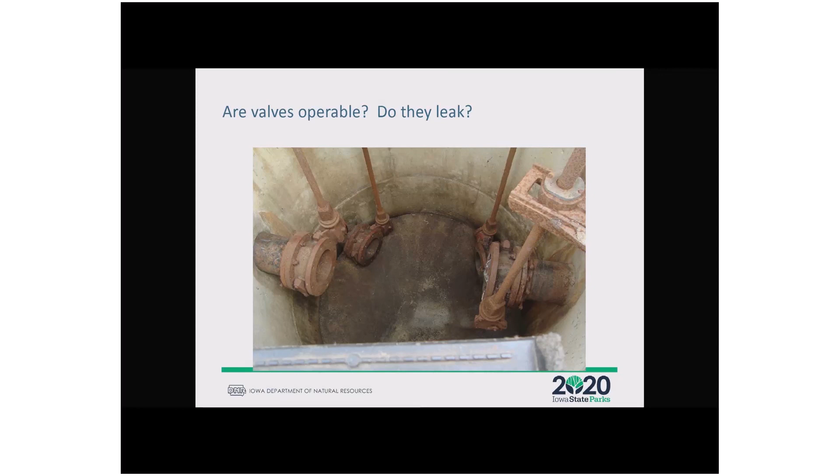Some things that are applicable to all facilities: flow measurement, making sure that we've got it at an accurate, safe, and appropriate location. For raw waste, we want to make sure flow is being sampled with everything that's coming to the facility. So before things are split off to flow equalization basins or other processes, we want to make sure it's everything coming from the community to be treated - that's what we're looking for in raw waste flow. And from an effluent flow, we're looking at what's going out the effluent pipe. There are different ways to set up meters throughout the system based on what you have.

And I'll resume momentarily.

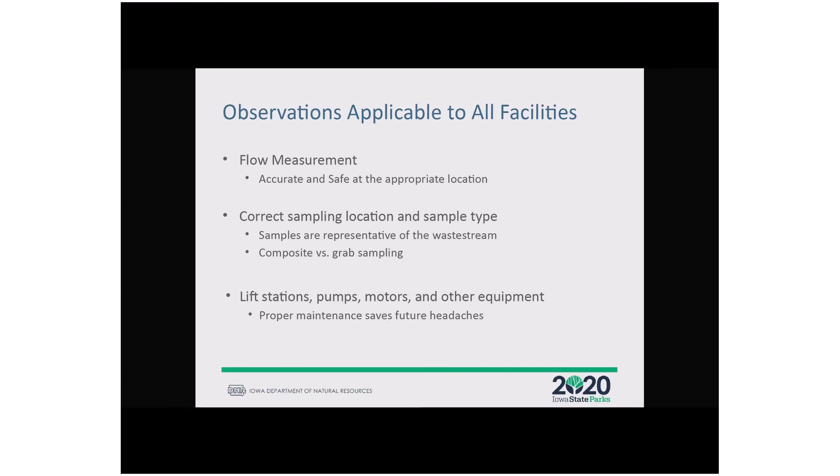We move to lift stations, pumps, motors, other equipment, things like that, just making sure that it's being maintained. So that note there, that proper maintenance saves future headaches. Stuff typically doesn't break on a sunny Tuesday morning at 9 o'clock when you've got all day to fix stuff. It's usually going to be Thanksgiving night or Friday afternoon right before you want to go home. That seems to be when things break. So a little bit of maintenance can go a long way to prevent those future headaches.

And if you find something that looks broken, sounds broken, or smells broken, please fix it. As Shane mentioned, a lot of times you end up doing work in the collection system and identifying problems, but that doesn't get taken to the next step of being fixed. If you don't fix it, you haven't really done anything. So making sure that things get fixed when they get identified.

Honestly, failure to properly operate and maintain a facility is the most commonly cited violation. Whether it's EPA doing an inspection and citing violations or DNR doing it, failure to properly operate and maintain is the most commonly cited violation. So making sure that you're putting effort into maintenance is important.

A little bit on the accuracy of flow measurement and some examples. Just an easy one, we see a lot of 90-degree V-notch weirs. What you're doing is measuring the head through that weir and comparing it to a chart to determine your flow. It's happened more than once that somebody's got the wrong chart. So you might be doing all the measurements correctly, you might be doing the math correctly, but the factors you're putting into it aren't correct. So making sure that you've got the correct numbers and everything that goes into that.

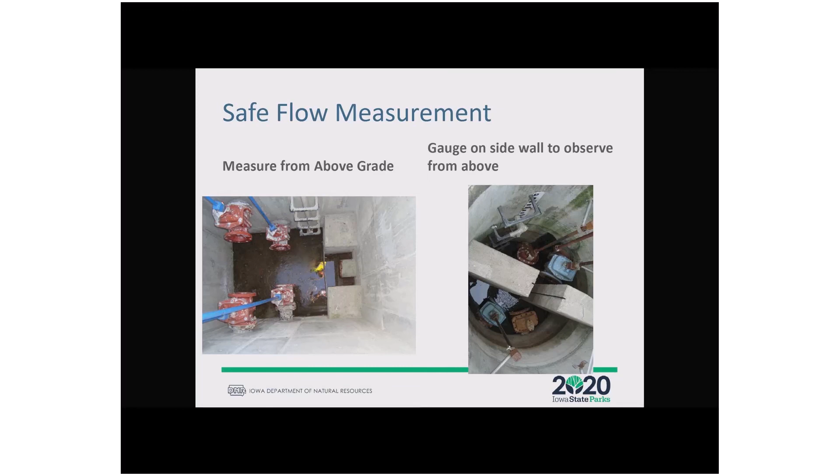Similarly, bar screens, making sure they're raked frequently enough, whether manual or automatic, different screening, make sure it's raked and cleaned frequently enough to prevent backups, because as your flow meter is reading the level of water in the system, if it backs up due to blockages, you're getting erroneous flow readings.

In regards to bar screens, another very common violation is stabilizing those screenings with hydrated lime before they go to the landfill. That word hydrated is critical. Lots of facilities use sweet barn lime or ag lime. This requirement comes from solid waste regulations, not wastewater regulations, and they require that stuff be stabilized by reaching a pH of 12. If you're not using hydrated lime, you won't reach a pH of 12 - barn lime or ag lime only gets you to about a pH of 8, so it's not sufficient for that stabilization.

Moving to the collection system and lift stations. We're going to look visually at the lift stations, want to get in and look at the wet wells if we can. How often are you visiting the lift station? What maintenance is done? Is it cleaned out? Trash baskets emptied? And again, that trash basket material needs to be stabilized with lime to get to that pH of 12.

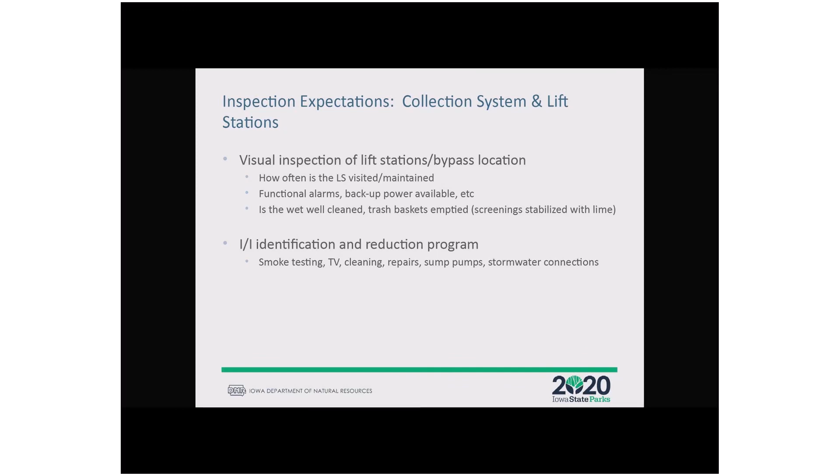Paying attention to pumps and motors. A lot of times we'll have hour meters on them. If one pump's running much more frequently than the other, ask yourself why, and then investigate it. Are we looking at issues with impeller wear, pump cavitation, poor placement, rubber duckies? What is it that's causing that one to not function the way it should?

Especially if you're using hour meters and pump run times to determine flows, make sure there are occasional drawdown tests to determine the pumping rate, so you know the capacity of your wet well or a portion of the wet well. How long does it take to pump it down? Do both pumps run comparably? How do they run if they're both on? And if you do this on a routine basis, how do those results compare to the previous test?

If you are using this for flow determination - raw waste flows specifically, but any flows - a lot of times we'll see a spreadsheet people put together where they just put in pump run times and it calculates the flows for them. The one thing in there is those pumping rates, so if you do a drawdown test or evaluate the pump rates and it changed, make sure you change your spreadsheet so you accurately account for that in your flows.

If you've got any squealing, grinding, smoking, banging, anything like that, those are typically problems, so make sure you are addressing the issues that are going on. Although I heard it's been replaced, I know of one community where the best running pump was the one that sat there and squealed for years and years and would never quit. I did hear it's finally been replaced, but it was the one that seemed to run the best.

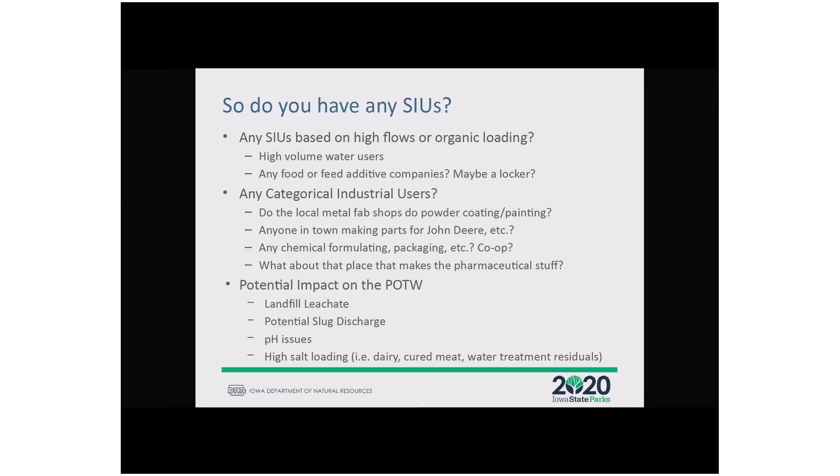In general, on the water treatment residual side of things, if it's the city's treatment plant discharging to the city's wastewater treatment plant, we do not require the treatment agreement aspect of it. That's in the oversight realm.

Significant industrial users are required to have a treatment agreement with the city, signed by both parties, identifying who's responsible and identifying the limits for what that facility does and what the limits are for the discharge from the facility to the city. That gets incorporated into the city's NPDES permit and includes the limits, then sets the monitoring frequencies for the industrial user.

So there's an expectation for the city to make sure that the industry complies with that treatment agreement. That might mean you've got to visit the facility regularly, develop some kind of rapport with them to help them help you stay in compliance.

How do we make sure that they're in compliance so it's not impacting your treatment plant or the environment? When we do an inspection of your facility, we are likely going to visit one or multiple significant industrial users as well. You're always encouraged to go along with those. Usually that tells me whether you have the ability to go there and whether you've got a rapport with them.

If the DNR reviews compliance, we typically do that on about every 6-month basis. And if we look at the industrial user and they have a lot of violations, enforcement action is going to depend on what's going on. So enforcement action for the industry depends on the severity of their violations.

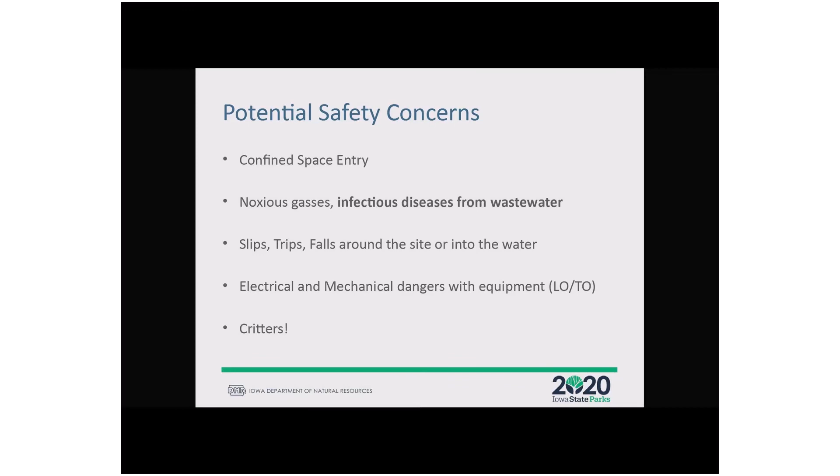So caution near your water. If you've got to go out on the water, maintaining your aeration system. If you've got railings around aeration basins and things like that, making sure they're maintained so you have a safe working environment. Critters—obviously these aren't from Iowa, but wasps, with these nice sunny days we've had, wasps are definitely coming out and they love to be in control panels and things like that, so pay attention.

Nick, I saw you're online. I'm not sure if you've seen any rattlesnakes down in Winterset yet, but when it starts to get sunny and warmed up here, I wouldn't be surprised to see some snakes crossing the drive or in the parking lot. So there are venomous snakes in the state, and they can be around our facilities. Haven't seen any gators in the sewers in Iowa yet, but people flush all kinds of things.

And I don't have the picture in here, and it doesn't really fall under critters, but safety at pump stations—I incidentally took a picture of a pump one day and didn't notice it until I was actually trying to put it into my report, and there were hypodermic needles sitting right on top of the pump. So people flush all kinds of things. You never know what's going to be there. Just make sure you are keeping yourself safe.

Sampling—DNR used to do a lot more sampling during inspections, but that doesn't necessarily mean we're not going to collect samples when we come out, especially if there are water quality issues suspected that we observe, or we find a discharge. I mentioned pumping sludge to the creek earlier. If we find that when we come to do an inspection, we're going to collect samples because it's likely going to become an enforcement case.

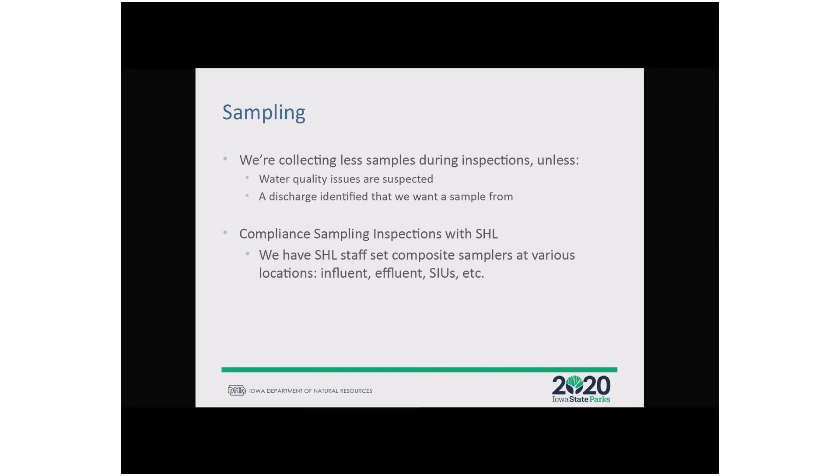One other thing I realized I didn't put a slide in here for is operator certification. Obviously you're taking the time today to maintain your CEUs and your certification, but just a discussion on the staff that's there—whether you've got properly certified operators for the operator in charge and also for shift operators. So if you've got people working weekend shifts where the certified operator's not always there, making sure they've got the proper levels of certification.

So jumping to final thoughts, there's going to be a report out of some sort at the end of the inspection—attaboys for things you're doing well. There's always recommendations for things that can be improved, and what to expect in the report. When you get the report, it shouldn't really be a surprise. So you should have that information as the inspector leaves the site of what you can expect.

Another big thing is, is there anything we can include in the report to help you get what you need? Sometimes council or management-level staff doesn't want to listen to you if you continue to ask them for things. But if there's something we can lend support to—whether that be additional work in the collection system, or getting a piece of equipment to help you do your job better—I can't necessarily argue to get you a raise, but if there's something that needs to be done and you just can't get the support to get it done, we can put those as recommendations in our report, and sometimes that holds a little bit more weight. So don't be afraid to ask. We can always either put in a recommendation, or if it's out of our wheelhouse, we'll tell you we can't do that, but we can lend support where we can.